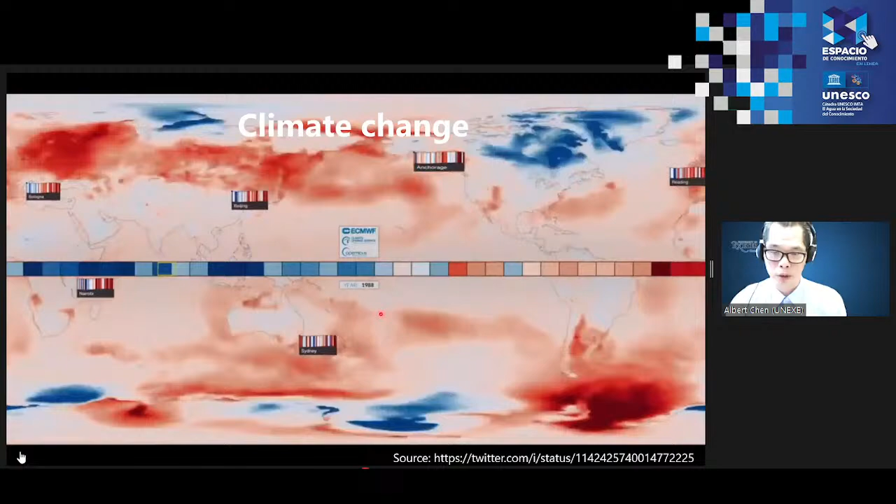So today I'm going to give you a quick introduction. We've been listening to the ambassador and Madam Secretary, who already highlighted the importance of climate change and how this will affect our society. With climate change, we have seen some change in water resource distribution because temperature change is driving a change of precipitation around the world, leading to more extreme and uneven distribution of water resources. This has also led to huge problems for the environment, creating challenges for water quality management.

On the other hand, we have also witnessed sea level rise in many coastal countries, affecting communities and increasing coastal flooding. Combined with extreme weather events driven by temperature and rainfall change, this also affects the likelihood of flooding in many parts of the world. This changing temperature also affects the likelihood of heat waves, leading to droughts in many parts of the world. All of these have impacts not only on property, but more importantly, huge impacts on human health.

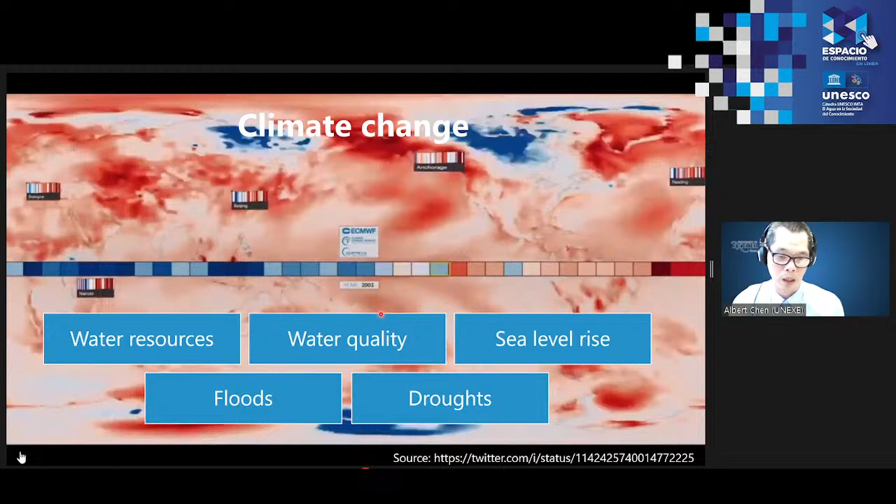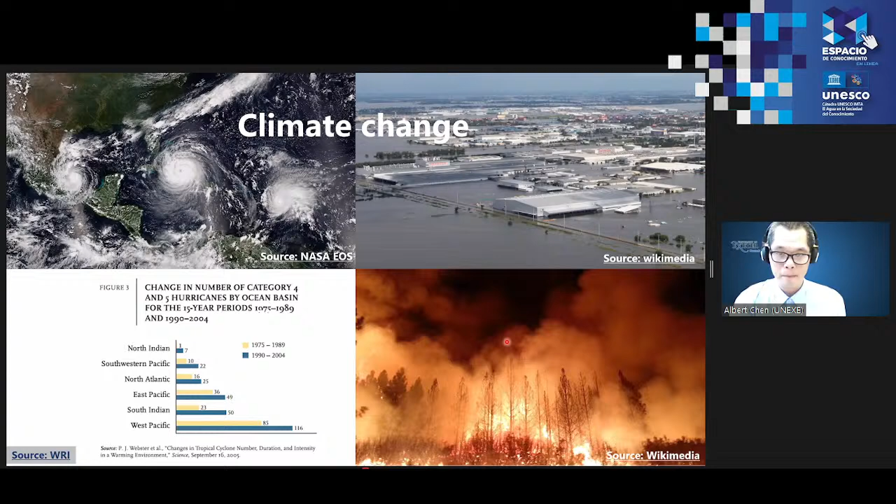So as a result, we try to focus on how flooding will impact human health, through different projects we have conducted recently. The first one I want to introduce is looking into flooding and how it associates with pollutant and pathogen propagation.

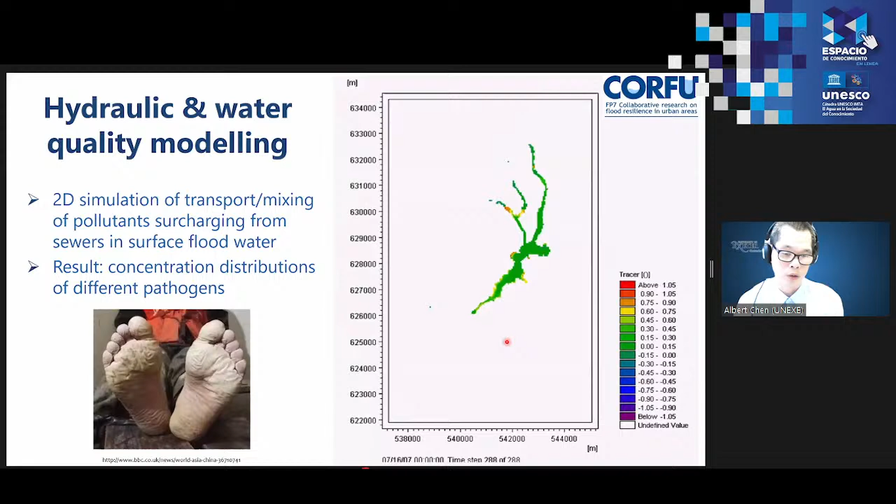As a result, we adopt an approach called Quantitative Microbial Risk Assessment, QMRA, to quantify the risk associated with flooding on public health. First, we use a hydraulic model to simulate the dynamics of a flood, and combining this with water quality data, we are able to find out the dilution and concentration of different pathogens in the flood water.

Then we combine this with other information such as the exposure of different people and populations in those areas, and combining with different age and gender population groups, we identify the vulnerability of people who have contact with the polluted water—what's the likelihood they will get ill.

We use a Monte Carlo simulation to run many scenarios to see the possible combination of different conditions. With that information, we create a map or statistical information on the probability of infection for different demographic groups exposed to the pathogen risk, so we can quantify the likelihood and how many people would be affected by this water pollution and their health impact.

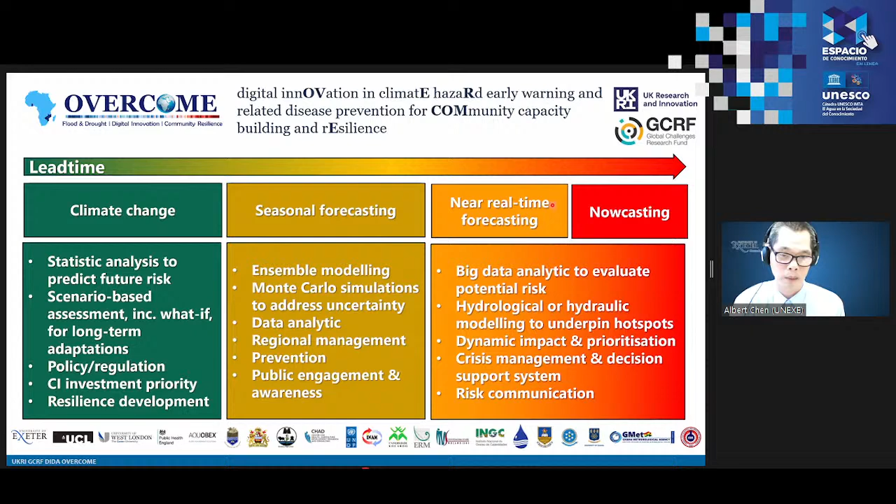So the next one is not really about climate change, but it's what we are all experiencing at this moment. This is work we recently developed, trying to look into how we can use our intelligence in water to better predict the spread of COVID in communities, and better inform public health managers to adapt and make quick decisions to prevent the spread of COVID-19 in our community.

So for this, we try to take measurements from the wastewater, combining with biomarker information within the wastewater, so we're able to analyze the population and which areas in the community are more likely to have higher potential COVID-19 cases, based on measurements taken from wastewater. People might already be infected by the virus but not yet show symptoms. By using this technology, we can identify which areas have higher potential, in order to enhance public health facilities or services for those areas, or implement response measures to reduce the spread of COVID-19 in communities and better protect public health.

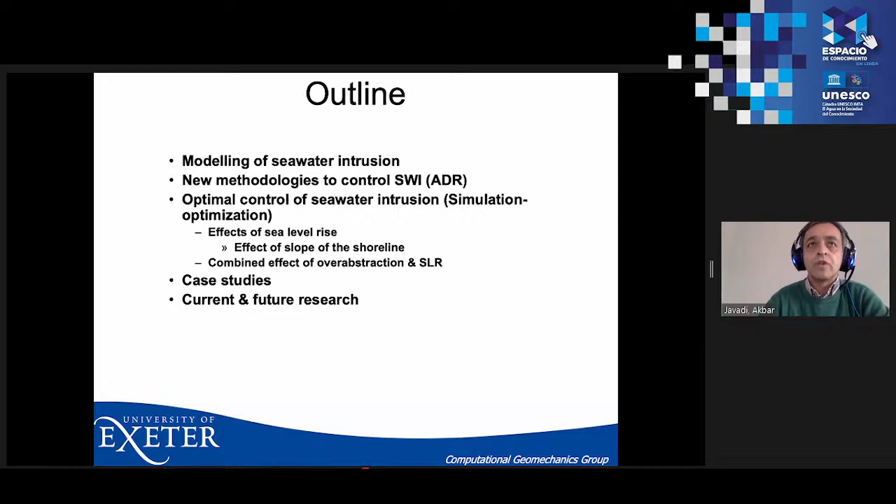As background, about 70% of world population live in coastal areas, and many of these coastal regions depend either entirely or mainly on groundwater resources for their water supply. In coastal areas, groundwater is in direct contact with saline water under the sea. With increasing population, there's increase in water demand.

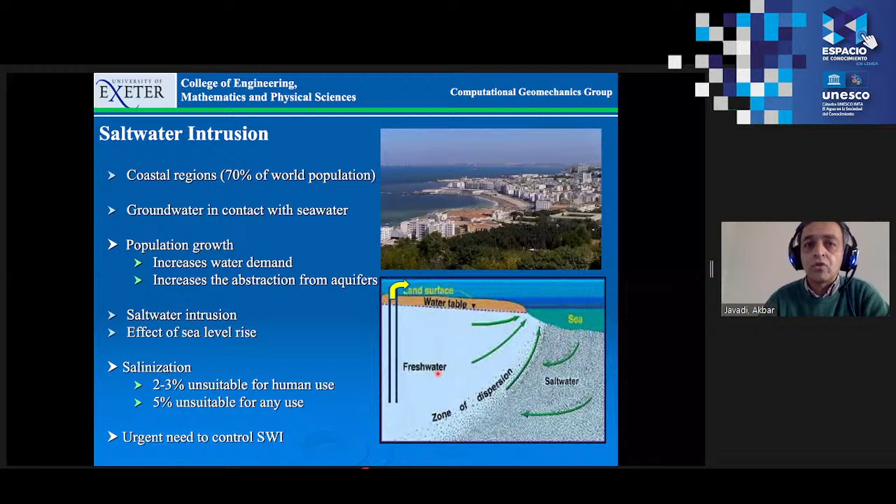As a result, there's increased abstraction from groundwater, which results in intrusion of saline water into aquifers. On the other hand, with sea level rise, the head of saline water increases, which pushes the salinity further into groundwater. The problem is that a very small percent of salinity in groundwater could make it unsuitable for human use or any other uses. Many countries have lost their coastal aquifers to seawater intrusion, so there's an urgent need to control seawater intrusion.

For this research, we started with developing a numerical simulation model to simulate flow of water and salinity in soils, adapted to simulating seawater intrusion. We have validated it against standard benchmark problems and against analytical and other numerical simulations.

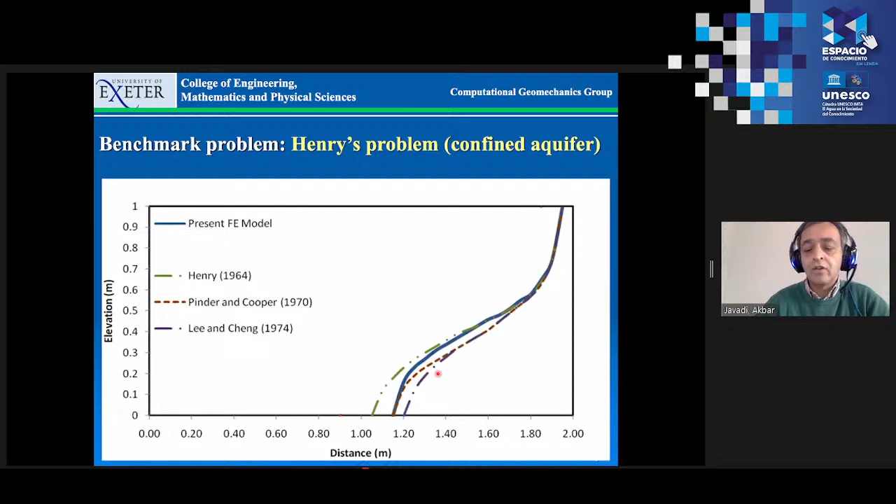Then we used the model to propose a new method for controlling seawater intrusion, based on abstracting the saline water and at the same time recharging the aquifer with treated wastewater, stormwater, or other sources of water. This abstracted water can either be dumped in the sea, or in areas of the world where there is water scarcity, it can be desalinated and used as part of water supply.

We have also proposed a similar method to the previous one, but this time the recharge can be done by gravity using surface ponds or tanks under the ground.

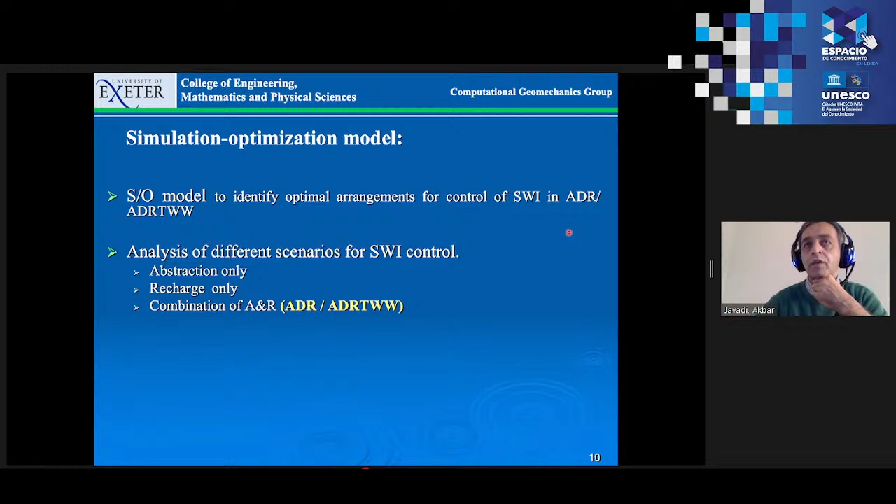We have developed a simulation optimization model in order to optimize the arrangement proposed in the previous method of control, and we have applied it to a number of case studies, including a benchmark problem.

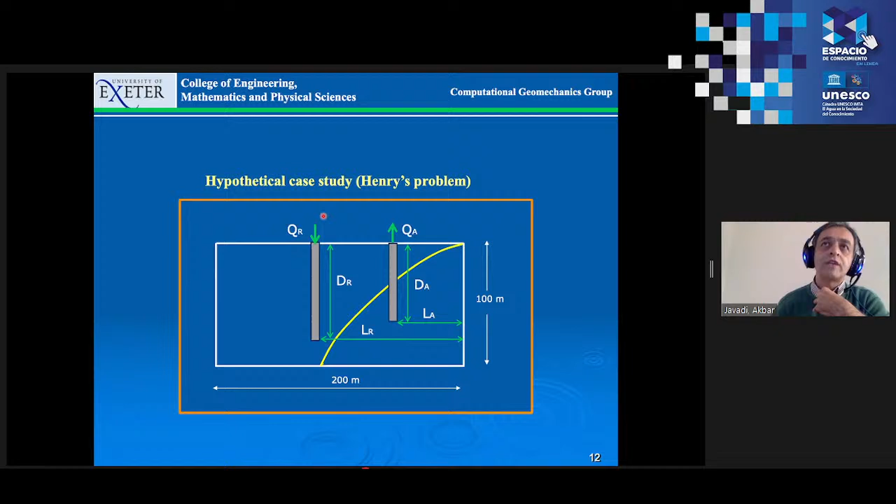We formulated the problem as an optimization problem: if we are going to use abstraction and recharge, what would be the optimal location for abstraction and recharge wells in terms of distance from shoreline? What would be the optimal depth for each well? At what rate do we need to abstract? At what rate do we need to recharge in order to minimize the overall cost and minimize the salinity in the aquifer, subject to some practical constraints?

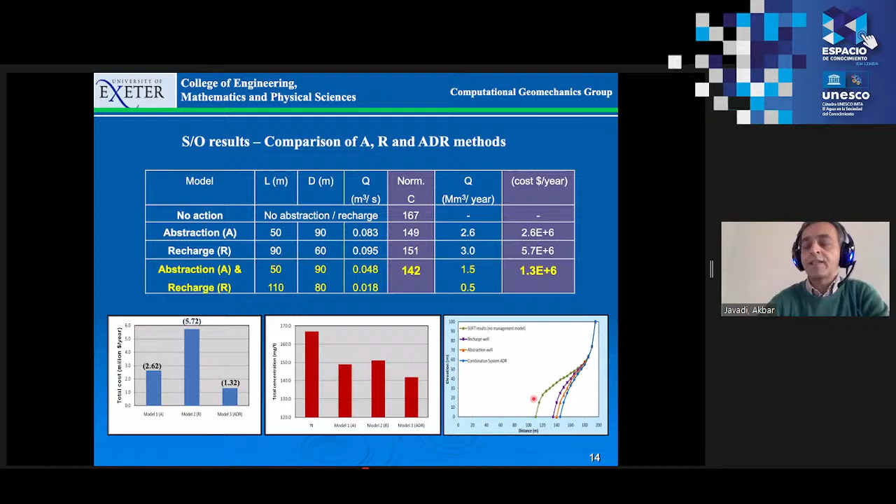This is a summary result of this application to a benchmark problem. We have shown that compared to existing methods like abstraction only or recharge only, our proposed method can significantly reduce the cost, significantly reduce the salinity in the aquifer, and push back the interface between saline water and fresh water further towards the sea, creating a larger volume for fresh water.

We have done the same for the other method, using gravity recharge, and performed similar optimization without going into too much detail.

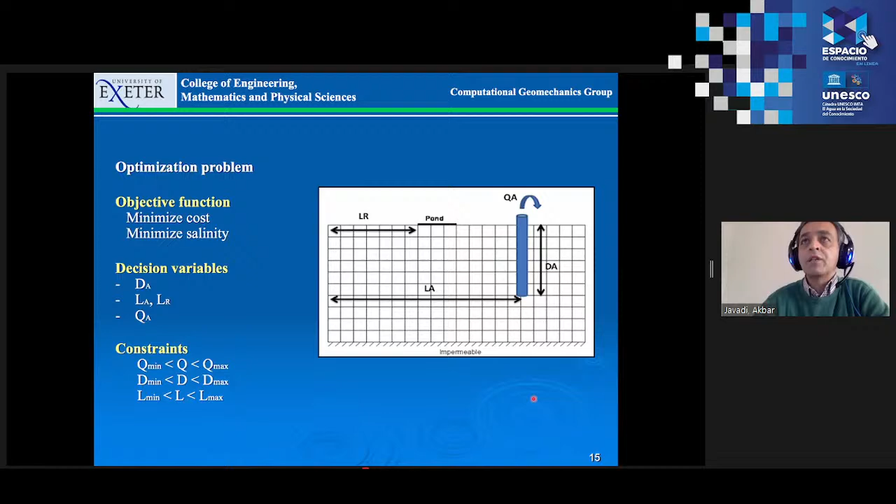We have shown that our proposed method can reduce the salinity by 65%, compared to 26% for abstraction only, at much reduced cost, at a quarter of the cost of abstraction.

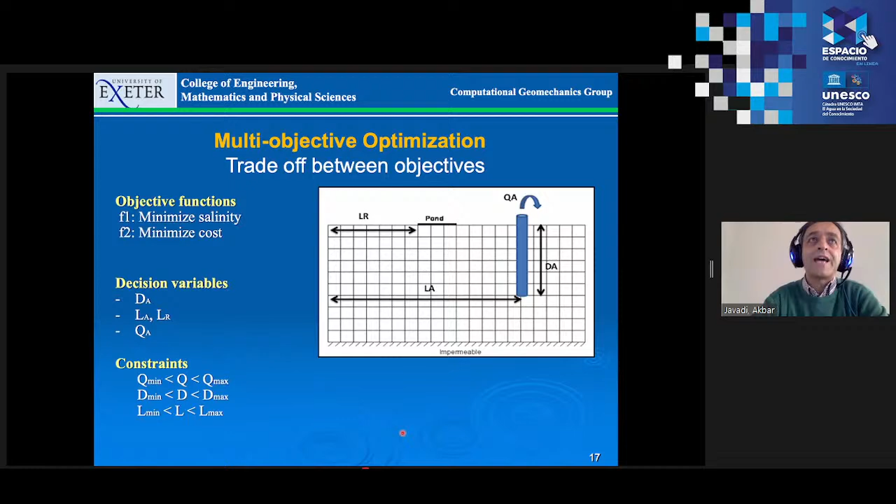We have also used multi-objective approaches to trade off between different objectives of cost and salinity in the aquifer. For the second case, we compared our method with recharge only and abstraction only, and shown that the trade-off our proposed model produces significantly reduces the cost and reduces the salinity compared to other methods.

So the advantage of this approach is decision makers will have a lot of options to choose from, depending on what trade-off they can accept in terms of salinity and cost.

The next study we have done is the effect of sea level rise on salinity intrusion. By increasing sea level, the head of saline water increases, which pushes the salinity further towards the land. On the other hand, depending on the slope of the shoreline, a large area of the ground can be inundated, flooded by rising sea levels, which further moves the interface between saline water and fresh water, exacerbating the situation.

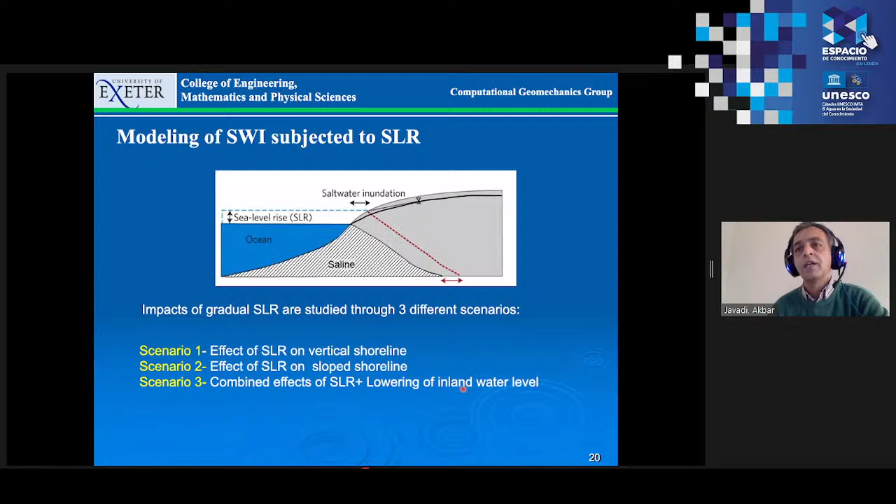Here we have looked at different scenarios: the effect of sea level rise without considering land flooding, the effect of this flooding as well as sea level rise, and also the combined effect of sea level rise and over-abstraction in the form of lowering of the groundwater table.

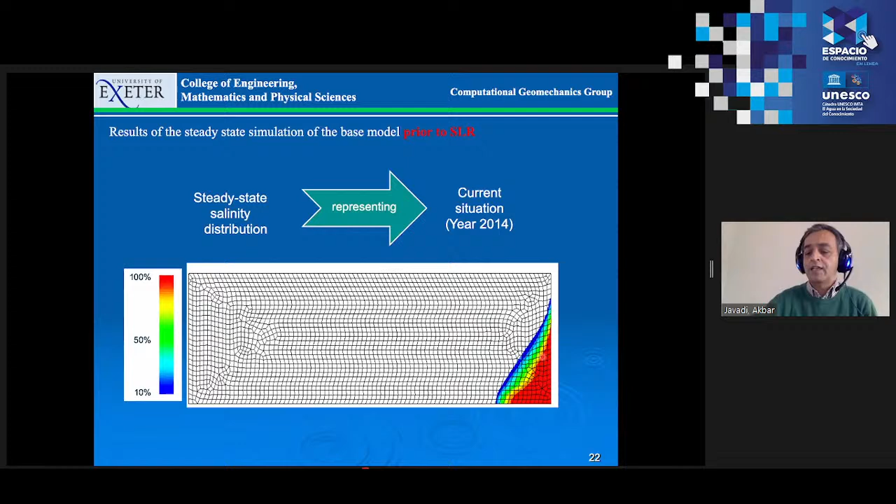For sea level rise, we considered a moderate increase based on IPCC recommendations - by the end of the century, we assume the sea level will gradually rise by 0.65 meters.

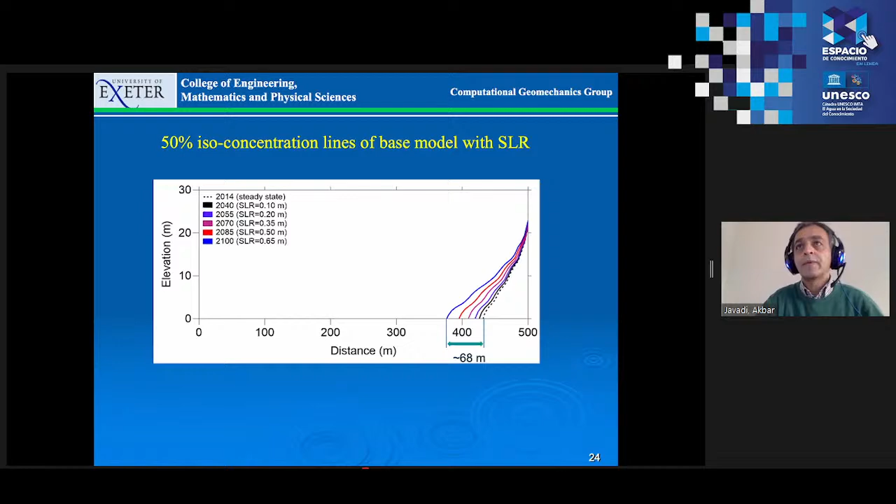Here we show the interface between saline water and fresh water. We've shown that by increasing sea levels, the interface will move gradually towards the land, towards the groundwater, and this shows how it gradually moves in different years throughout the century.

In that analysis, we did not include the effect of land flooded by seawater intrusion. Here we considered the effect of the slope of the ground as well, analyzing it for different slopes. We have shown that the flatter the slope, the larger the area of land flooded, and the intrusion can be significantly more than the assumption of no flooding.

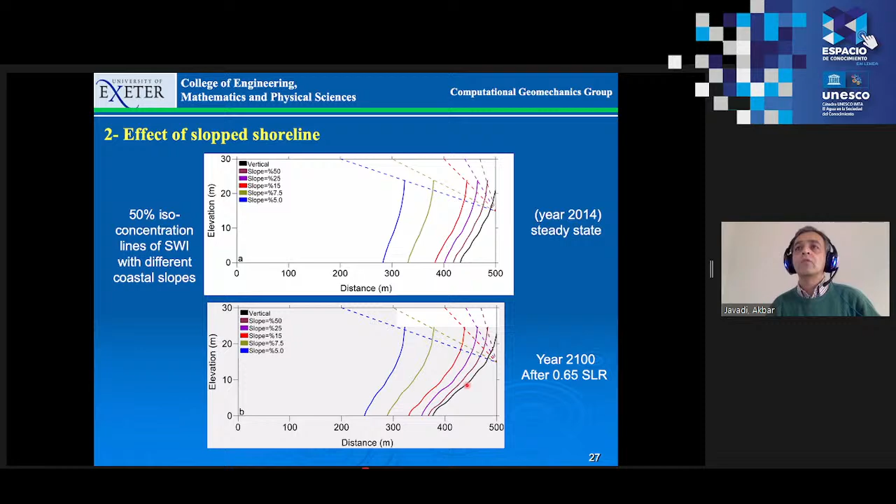And this is the results for the start of the analysis, 2014, and this is for the end of the century, where the gradual movement of salinity is predicted.

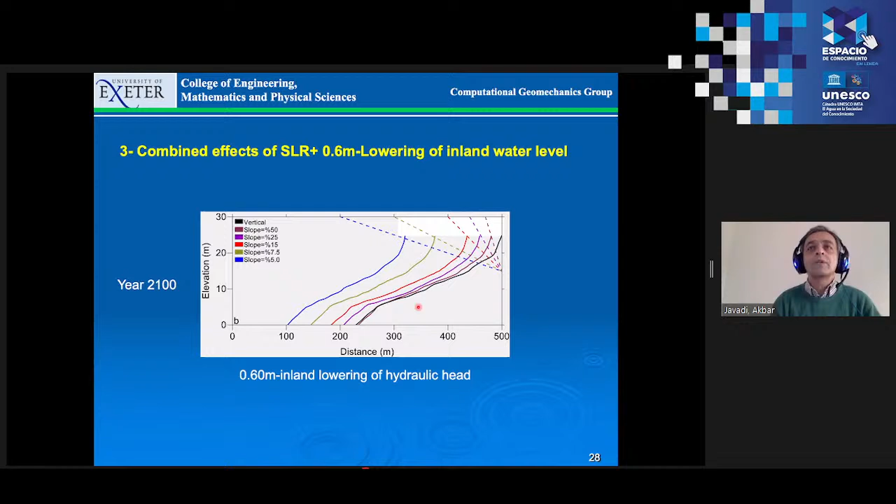For the last scenario, we analyzed the combined effect of sea level rise and lowering of the groundwater level due to over-abstraction. We see that in this case, the combined effect of over-abstraction and sea level rise could almost entirely contaminate the groundwater. So this is a comparison between the combined effect of sea level rise and lower groundwater versus only sea level rise.

We have applied this modeling, optimization, and control method to a number of real case studies in United Arab Emirates, Wadi Ham Aquifer, in Nile Delta in Egypt, Gaza Strip in Palestine, and Pingtung in Taiwan. In Taiwan, we also looked into integrated management of surface water and groundwater resources, trying to see how we can use flooding against seawater intrusion using the proposed methods.

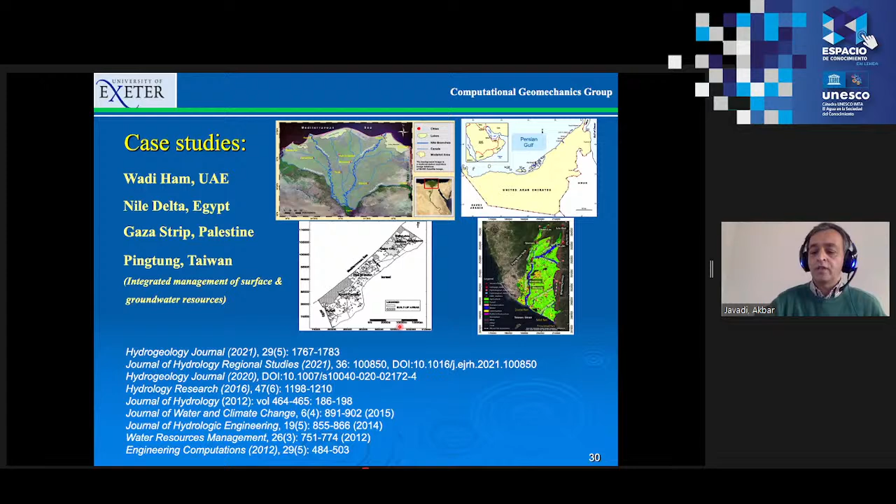So I would like to end here, and I would like to acknowledge the funding we have received for this from British Council and Royal Society. I would be very interested to discuss this topic further. Here's my contact details - thank you very much for your attention.

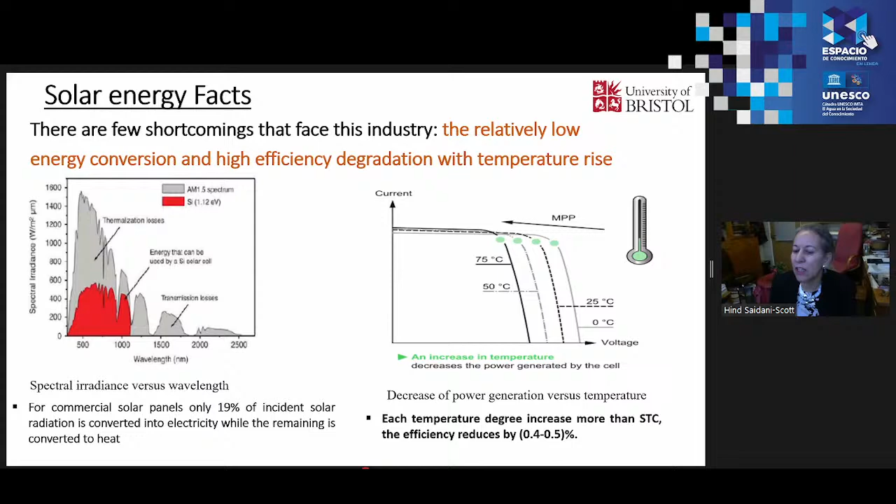Technical solutions: we have various solutions to solve this problem. One is the active system - we put a fan and a pump, or we pump cold water, or we blow cold air. It's power consuming, so all the energy you gain from what you're losing at very high temperature, you're going to use to run these fans - so it's not very economical. It's based on forced convection, which is better than natural convection. It is an effective cooling system because it's forced and in direct contact.

The other methods are what we call passive systems. We don't use any power consumption. They are based on natural convection, so we let the air circulate by itself if it is cooler, which is not always the case. It's less efficient than forced convection, but it has good, acceptable cooling performance.

The material we use for cooling, we attach it under the PV panels. Both methods eliminate some heat - they take the heat from the solar panel, and then we can use this heat. We can either use it for recovery from the PVT - what we call photovoltaic thermal panel - where we heat the water and use it either for heating, air conditioning, or other things. Or we can just dump it into the air.

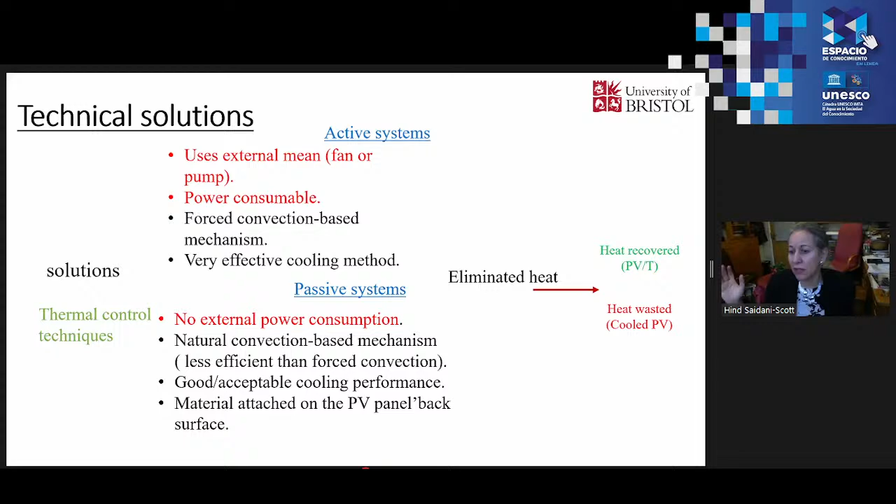In our group, our research objective is first to search for sustainable solutions for enhancing thermal and electrical performance of PV panels and benefit from the absorbed heat in the material, for other applications like heating, humidifying, water generation for greenhouses, or even cooling. Second is applying new innovative systems that use different heat and mass transfer mechanisms for cooling solar panels, using nanotechnology to increase thermoconductivity and system efficiency. From that, we're developing a new nano-hybrid PV system with an eco-exergy study showing it is feasible, durable, sustainable, and based on renewable sources.

So what we are doing, I'm going to go quickly and explain. We have an experimental setup—the majority of my work is experimental, and we do analytical work too, but we've done some simulation. The majority is experimental.

We have a laboratory, the thermofluid lab at Bristol in the engineering faculty. We have a heat source simulating solar energy, and we put different materials under it. We always have a reference material, and we can change the irradiance from 1,000 or 800.

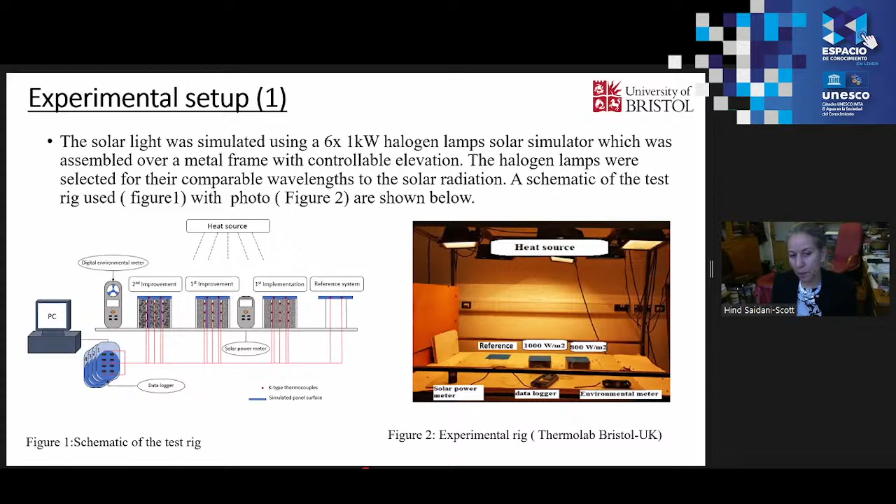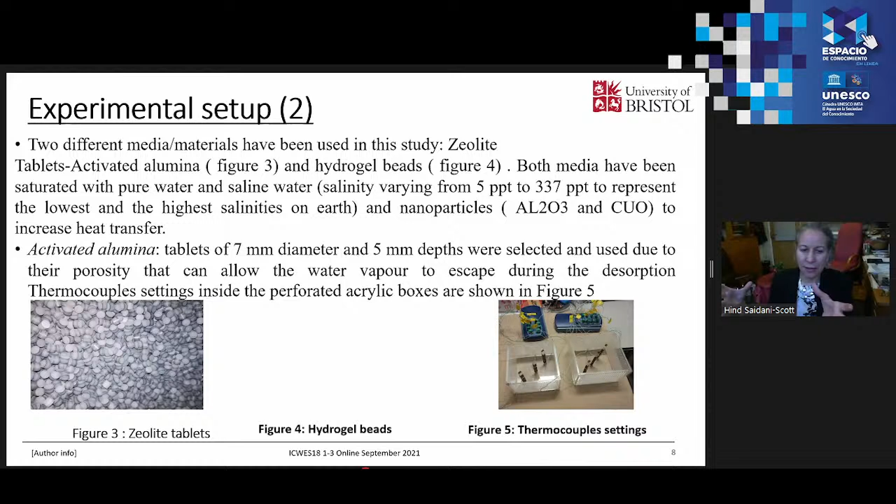What we are doing is trying to cool our solar panels using materials that we put underneath them. We wet them at night, letting them become saturated, like zeolite—we have zeolite here, and also activated alumina. We also have hydrogel beads, shown in figure 4, which we saturate with water.

I don't know if a lot of you know what zeolite is. Zeolite consists of solid tablets, so their volume doesn't really change, but they are very porous and they absorb water. The second material is hydrogel.

I think a lot of you have already seen hydrogel. They are very solid, small bits, and when you put them in water, they take up to 500% of their volume in water. We put them around plants, or in other places where we want to keep humidity—not water content, but just humidity. They keep evaporating; water evaporates from the hydrogel and keeps the environment humid. So we are using this.

We have used these two elements, zeolite and hydrogel, to cool the PV panel. We put them in water all night, and in the morning we place them under the solar panels. We study the thickness needed to cover the complete temperature range from 10 o'clock until 4 o'clock, with the maximum, of course, between 12 and 2, so as to cover that whole period.

So the water, when it evaporates, gives us the latent heat of evaporation. It's cooling the back of the solar panel and making it a lot more efficient.

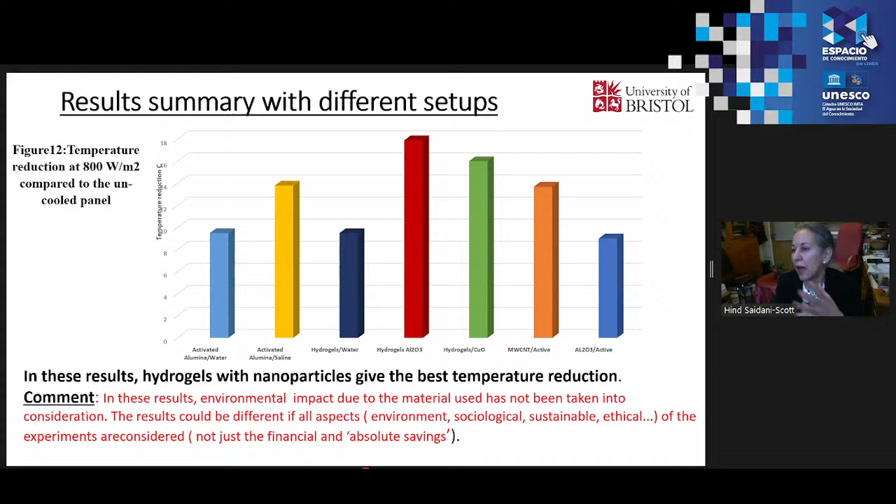In these results, the environmental impact due to the material used hasn't been taken into consideration. The result could be different if all aspects—environmental, sociological, sustainability, ethical—are considered, not just financial.

So that's the kind of study that we are doing, and we want to do more of it. Thank you.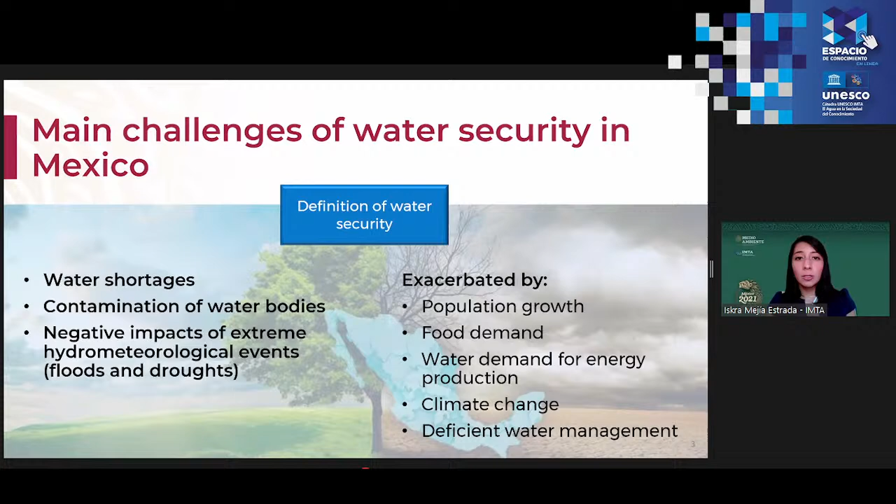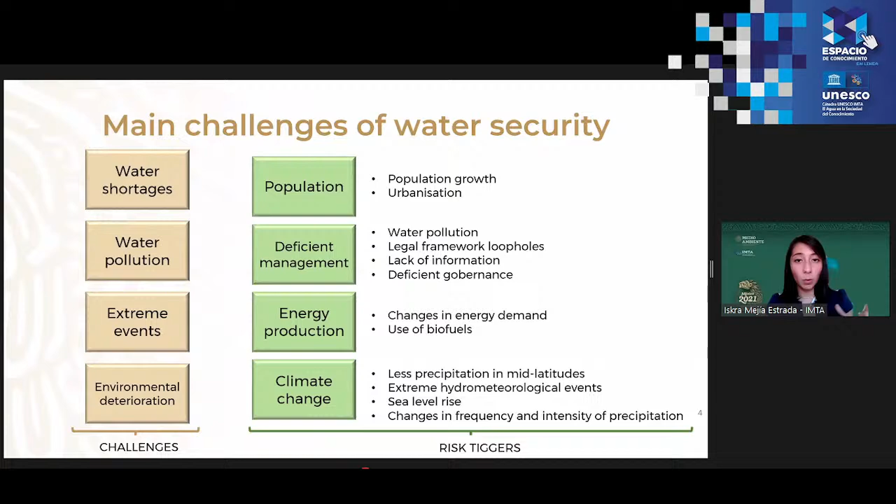So this diagram is pretty much a summary of what I've just mentioned regarding the main challenges of water security. We have the challenges, and on the right side we also have the risk triggers, grouped by sectors because this allows us to determine more specific solutions and outline better objectives for the projects. It's really important to determine which sector or which triggers cause these challenges of water security, because, as I often repeat in any talk I give, you can't improve what you can't measure. So it's important to identify the sectors to have a better outline of the problem we're facing. And to add to all of this, we also have the impacts of climate change.

The main impacts will be seen precisely in the hydrological cycle. In the case of Mexico, recent studies estimate that by the end of the century we'll have a decrease in precipitation of around 15%. There's also a decrease in surface runoff and aquifer recharge that ultimately determines water availability. This will be enhanced by climate change, because part of the precipitation will be retained and evaporated in soil and vegetation without even reaching surface water bodies or groundwater storages.

There's also a great area of opportunity to do detailed studies. For example, IMTA has made studies in the basins of the north and the transboundary basins regarding water availability using satellite-derived information.

In the case of food production in areas with irrigation problems, we also have to add the problem of wider or larger climatic variability. Here I'm talking about more frequent and intense droughts, followed by intense precipitation periods, which in general will lead to lower water availability.

So I'm going to present quickly a couple of projects being developed at IMTA. The first is about real-time forecasting of intense precipitation in urban areas, and the second is a project aimed at desalting groundwater through solar energy for irrigation purposes.

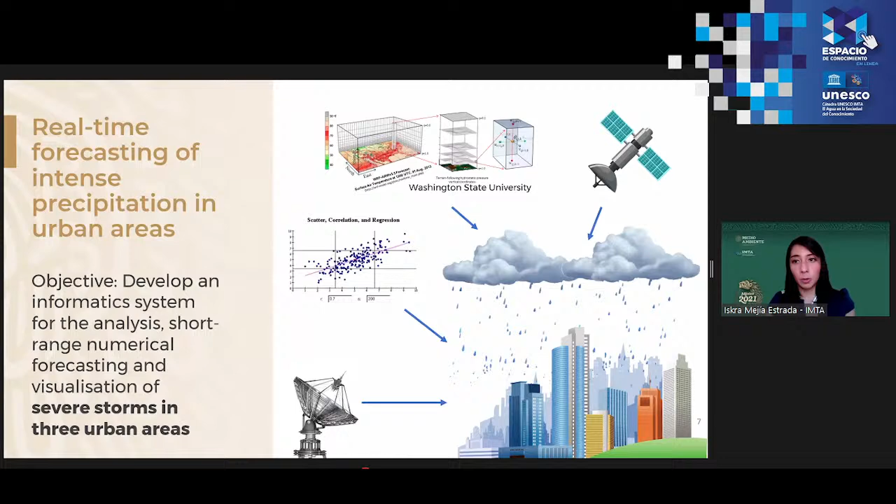This system is being developed for the National Weather System in Mexico, and we're going to provide information through a visualization platform that will contain the outputs of the numerical weather prediction modeling for the 3 areas, as we can see on the left.

We also provide information on the number of days with favorable conditions for convective storms using information from ERA5, and we're providing an analysis to determine the probability of severe storms. All these systems will be provided for the urban areas, and as I mentioned, the radar information will be provided for the metropolitan area of Mexico City.

We also have another project about desalting of groundwater through solar energy for irrigation purposes. The objective, as shown in the slide, is to implement a water desalting system for small-scale irrigation purposes.

In this case, we have technification in 4 stages shown in the slide, where the main actions will include installing a desalting system in a 600 square meter field. This is just a test field in the north of the country.

Regarding the practices shown in the slide, we also provide training in soil management and irrigation practices. This is something that characterizes the tasks of IMTA, as we develop technology as much as we make sure this technology is adequately transferred to those who will be applying it long term.

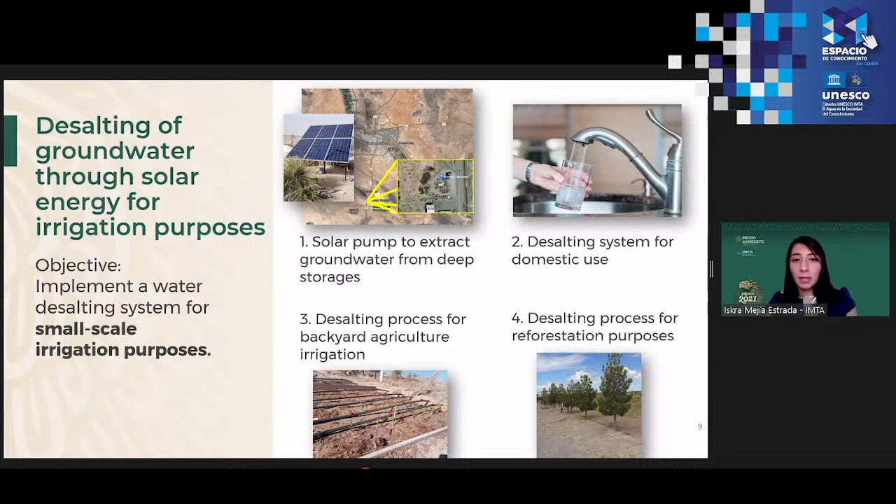Regarding the use of all the tools included, we do provide training, and we make sure that the people implementing these methods and systems have proper training and are adequately trained, to make sure the project is applied long term and not only during the duration of the action of IMTA.

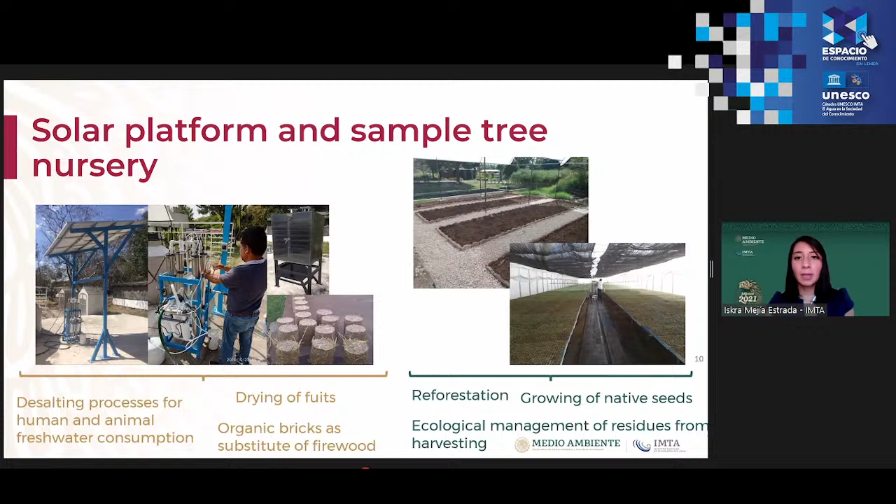The points I would like you to take home are mainly three. Regarding water governance, this requires solving the complex problematic scenario already described. An essential component, point number two, to adequately address the challenges of water security is knowledge and innovation generation. We definitely need a better understanding of both the natural and social processes involved in water management, highlighting the importance of considering all the anthropogenic factors. This has to be under the adequate legal frameworks to make sure water governance is appropriately observed.

Finally, water security in many countries has become a matter of national security, and no country can minimize the urgency of achieving adequate water governance through research and international collaboration. That would be everything from my part, so thank you very much for your attention.

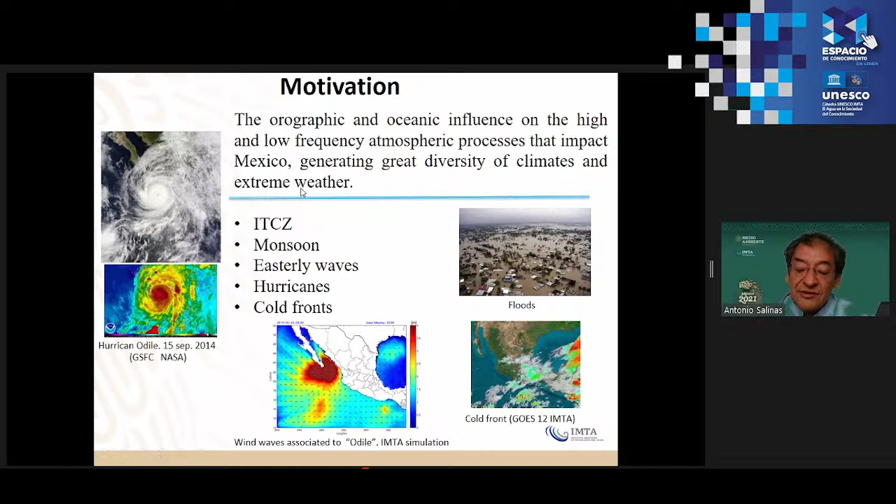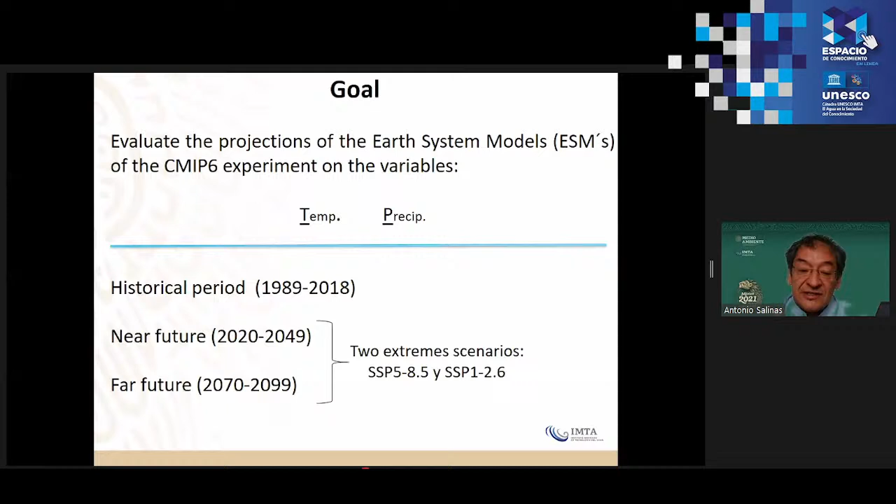As a background, the CMIP-6 project was planned to answer three questions. The first is, how does the system respond to forcing? The second is, what is the origin and consequences of systematic model biases?

We can see the model biases could be related to regional phenomena but also global phenomena and their relationship. For example, clouds and circulation is a complex process, and we have to understand better if this is a systematic bias, and also the ocean-land contrast. So the bias is not easy to identify and to associate to a process.

The third question is: how can we assess future climate change given climate variability, predictability, and uncertainties? With that uncertainty, we have to evaluate the impacts. This is not easy, and we have to decide how we can construct the best information for the public in general.

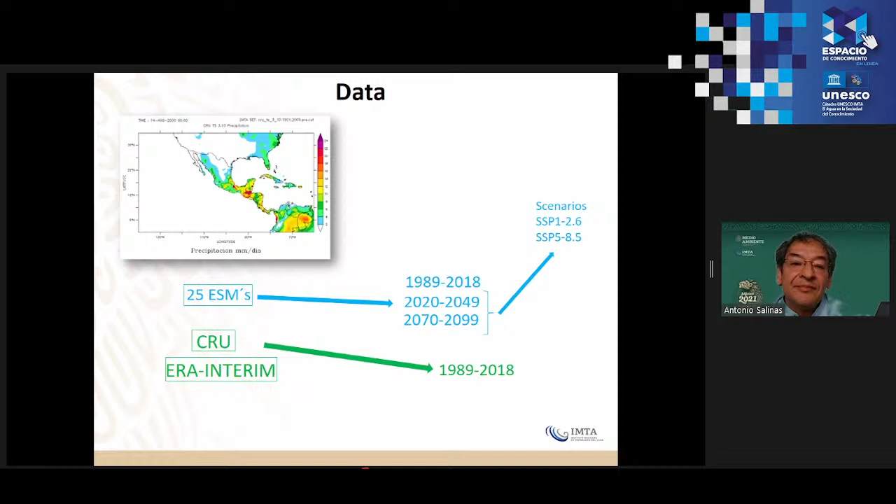The data we used to evaluate the models are the 25 models from CMIP-6, CRU data, and ERA-Interim reanalysis for the historical period. For the future, we use two extreme scenarios, so we can compare for the past, in the historical period, how well the model can reproduce the main processes here in the tropical part.

In a general way, the results can be seen in this simplified diagram. The database we use is the CRU observation and ERA reanalysis, and the 25 models we wish to evaluate, using metrics like root mean square error, mean absolute error, standard deviation, and correlation. We use just precipitation and mean surface temperature.

We calculated annual cycle and seasonal cycle for four regions, two in the north part of Mexico and two in the south part of Mexico. In a general way, we analyze spatial and temporal variability for these models for our region in Mexico.

Precipitation is one of the most difficult issues to simulate by the models. On the left side we have the ERA-Interim precipitation. We can see the typical intertropical convergence zone, and two extreme precipitation areas here in the south part of Mexico between Guerrero and Oaxaca states, and also in Chiapas. We can also see the monsoon and the middle center of the country with less precipitation.

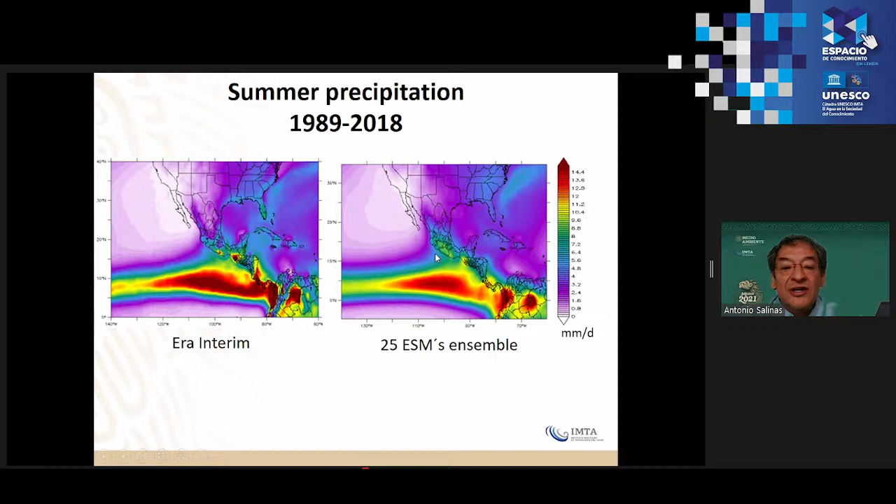With the multimodal ensemble, we can see in a general way the same pattern in the ocean. The ocean is easier for the models to reproduce the precipitation, but in the continents it's not so easy because of the orographical features. So in the models it's not well represented because of low resolution. But in a general way, we can see the distribution of precipitation in the continent, in Mexico, but without the extremes that we saw in the ERA-Interim data.

For temperature it's easier for the models to reproduce. On the left panel we can see the temperature; for example, in the tropical Eastern Pacific, temperatures less than 22 degrees Celsius. We can also see the effect of the mountains here in Mexico with less temperature, less than 20 degrees, because for example in Chihuahua and Durango we have this extreme temperature.

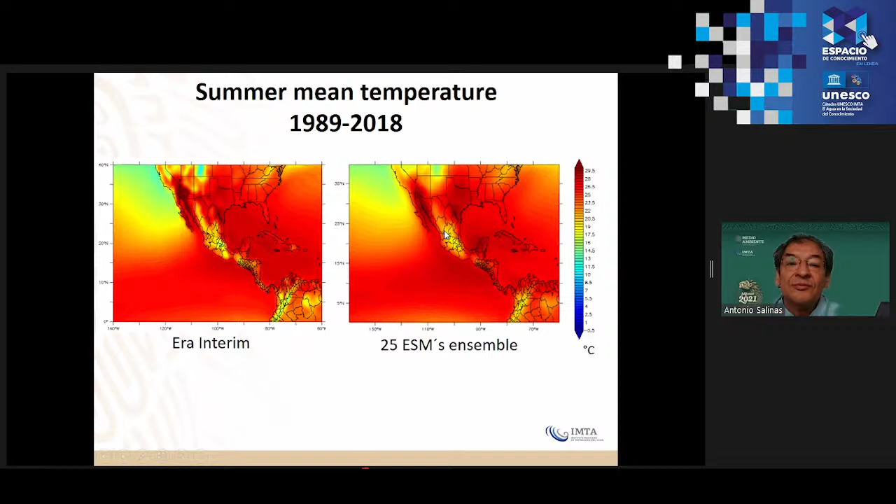For the multimodal ensemble, we can see in a general way the same spatial pattern, even in the continent. So the temperature is better reproduced by the models, even for the continents.

We analyzed 4 areas, and in the rest of the presentation I will focus only on the southeast area because we receive every year more precipitation here.

We can see, for example, the CRU and ERA data in the annual cycle graphic, and we can identify in a general way a bimodal distribution with two peaks, one maxima in June and the other in September from the historical period. The multimodal ensemble can reproduce in a general way the two peaks, but not the variability between July and August, that is, the midsummer drop.

For the future, the near future, for the 25 models, we recognize here a shift of the peak, from the maximum in September to possibly October. This is taking into account the 25 models.

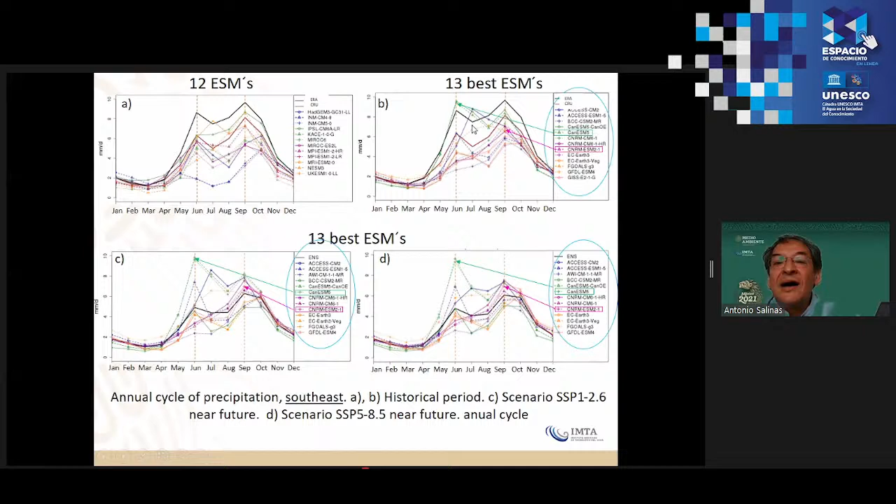I will say something different when we select the best models. In the top part of the panel we can see the 25 models; on the left side, the first half, 12 models, and on the right side, the best models. I will focus on the best models, and we can identify here in a general way the bimodal distribution, comparing with the CRU and ERA-Interim databases. But not all the models can reproduce this bimodal distribution, so that's why we have to select the best model or the best several models also.

So we can identify here the Canadian model and also a French model, the CNRM model. These two models are working better for our region here in the southeast part of Mexico. And the rest of the analysis will focus on this.

So for the near future, we can see, for example, here the ensemble of the models. Obviously, we don't have data for the future, but we can see that it still is here the bimodal distribution in June and September. And this here we have our best models, the Canadian and French models. And for the near future, we can see more or less less precipitation by 1 millimeter per day, some more or less.

We have to take this into account in a better way, because the ensemble is not explaining many things.

So for the temperature, we can see here, for example, the typical annual cycle for the southeast part of Mexico. We are in the same part. So we can see, for example, from April to September the maximum, that we recognize here with our best models, the Canadian and the French model.

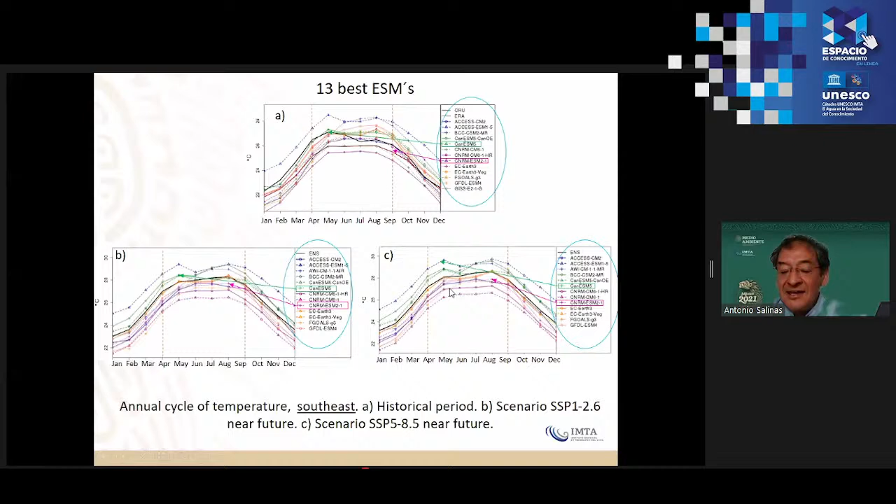And for the near future, but the worst scenario, we can see that in a general way we could have more, like 1 degree more than we have right now. But remember, we have seasonal variability, so we cannot only say that we will have more precipitation or temperature just in an annual perspective. We have to see that in a seasonal perspective.

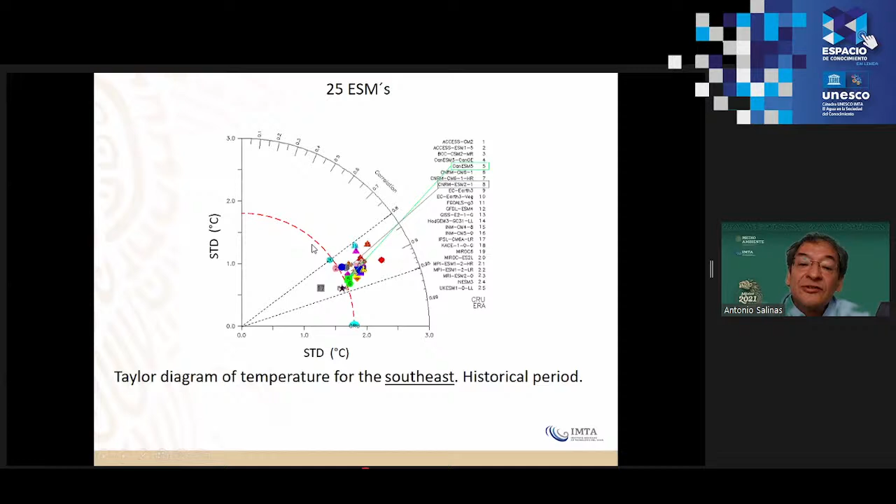Yes, thank you. So if we see the comparison between the 25 models with the CRU data, we can see that we have correlation between 0.5 and 0.8. But if we see the temperature, the correlation is better, 0.8 to 0.95. So we can recognize here our models. This is our best model, the Canadian model, with the least error, the mean absolute error.

So as a final remark, I can say that we recognize the best models, and using these models we describe the precipitation cycle in the southeast part, but also in the ocean, the distribution of the temperature of the ocean. With these models, we will improve precipitation and surface temperature using dynamical downscaling.

So next year and this year we are working on a program, a project with Canada, the Quebec University, and Universidad Veracruzana, to have this dynamical downscaling for two regions, in Mexico, in Veracruz, and also in the southern part of Quebec. So we also submitted a new project to CONACYT. We are working on that. We will continue to do that dynamical downscaling. So thank you very much.

Just by way of additional background, we simulate 3 types of flooding with our model. The first is fluvial flooding, which is flooding from main rivers where the river bursts its bank and inundates floodplains in the traditional way that most people think of flooding. But we also simulate pluvial flooding, which is flooding from intense rainfall, where we get quite localized and short duration flooding from heavy bursts of rain. We also simulate coastal flooding from extreme sea levels, which we, in a climate change scenario, will often add sea level rise to.

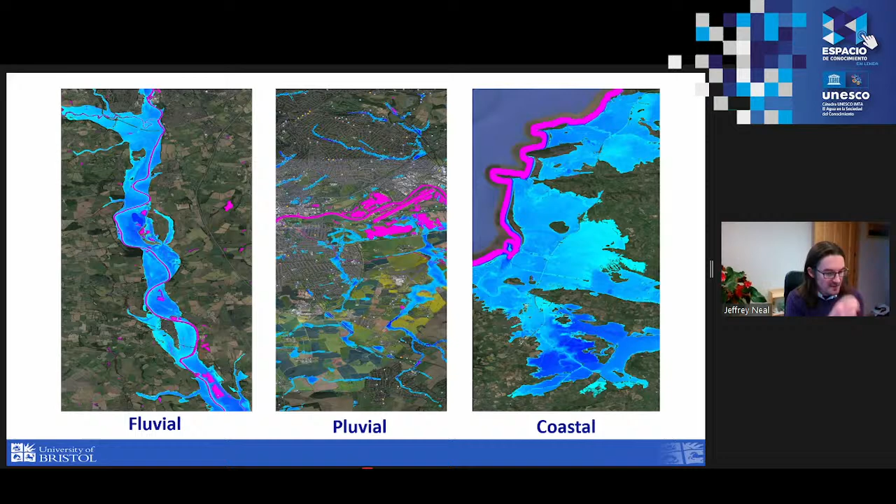The modelling that we do uses a hydrodynamic modelling system that essentially simulates the movement of surface water across the land surface in 2 dimensions.

This is an example from our UK model for the town of Tewkesbury in the UK. This is the River Severn. What you see in this simulation is initially at the confluence of these 2 rivers here, we see the river pops out of bank, and then we see the flood wave propagate downriver, down towards the southwest here, progressively flooding and then dewatering a little bit.

So this is the type of model we use, and the main development that we've been doing is working out ways to apply this model globally, and then to look at how climate might affect the simulations that we produce.

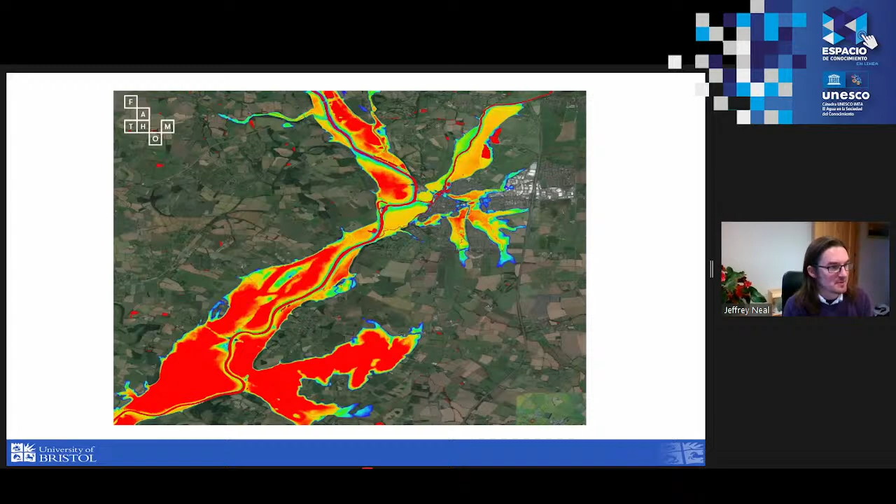That's for the UK. I can also show you an example of this model applied in Mexico.

Here we see the same model, but in this case we've categorized the outputs. Rather than showing a particular depth, here we've got categorized hazard based on the return period of flooding. So we see areas in blue that are quite unlikely to flood.

We expect these areas rarely to flood, going up towards the yellow areas where we'd expect flooding to be more regular, in this case about 1 in 20, 1 in 30 years. These will often be recognized floodplains by that stage. The low risk areas are those that have often been developed, in this case mainly for agricultural purposes, and where we might expect to see most of the flood risk.

So what I'm going to do is tell you a little bit about how we developed this global model, then take you through the evaluation of this model, and then some climate change assessment.

The global modelling work we do in Bristol really started back around 2005. As you can see, our plots back then are all in grayscale. But here we first started looking at simulating large-scale flooding in the Amazon River - this is a stretch of the Amazon and the Purus River, close to Manaus in Brazil.

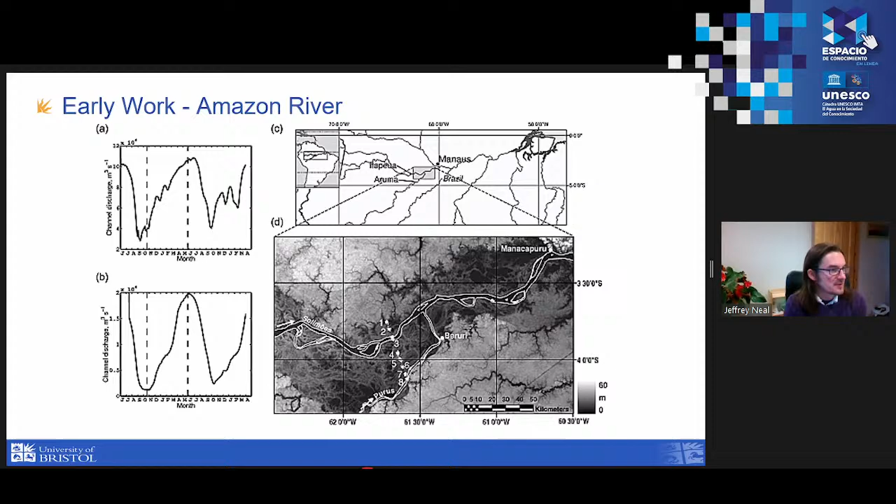Actually, the work was surprisingly successful, to be honest. We were able to simulate essentially the maximum extent of flooding observed each year with a reasonable level of accuracy. However, one thing the model really didn't do was dewater the floodplain in the right way.

And what this told us was that these models at the time, whilst they were able to recreate flood extents, really did that for the wrong reason. The reason places flooded wasn't because of the hydrodynamics or hydraulics really going on, but some other overland flooding mechanism that didn't really happen.

Around the same time, a lot of colleagues of mine worked on really understanding why these large global rivers inundated their floodplains and how we might better represent those processes in a large-scale flood model.

A lot of this work focused on understanding the role that river channels, particularly floodplain river channels, had on the dynamics of flooding in these large rivers.

Particularly interesting work by a colleague of mine called Mark Trigg, who's now at the University of Leeds, looked at how the connectivity onto the floodplain of channels in the Amazon River linked up the river to its floodplain and controlled the flood inundation dynamics that we saw.

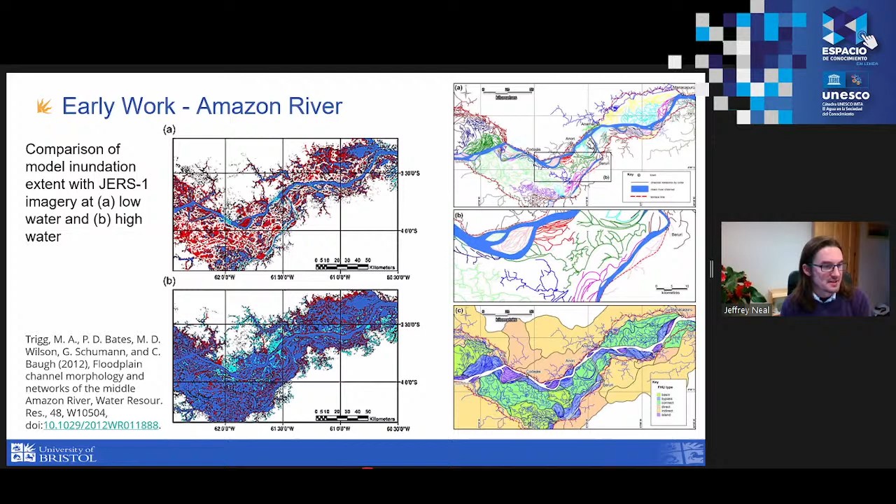So what we came up with was basically an extension to the model we already had. We developed a flood inundation model called LISFLOOD in Bristol. Essentially this is a gridded model - we lay a grid across the Earth's surface.

We give all the grid cells elevations, and then we put water onto that grid and the water flows downhill according to a simplified version of the shallow water equations. The water moves around and these models work really well at high resolution, but in our larger scale test cases they were fairly inaccurate.

So what we did was add a series of additional parameterizations to our grid cells to account for river channels. This is a model we call the subgrid model, and we added parameters to describe the bank elevations, the channel widths, and then made estimates via various means of the channel depths and frictions in our model.

This gave us a model that we could then apply over quite large areas efficiently to simulate the dynamics of flood inundation at large scale in a practical way.

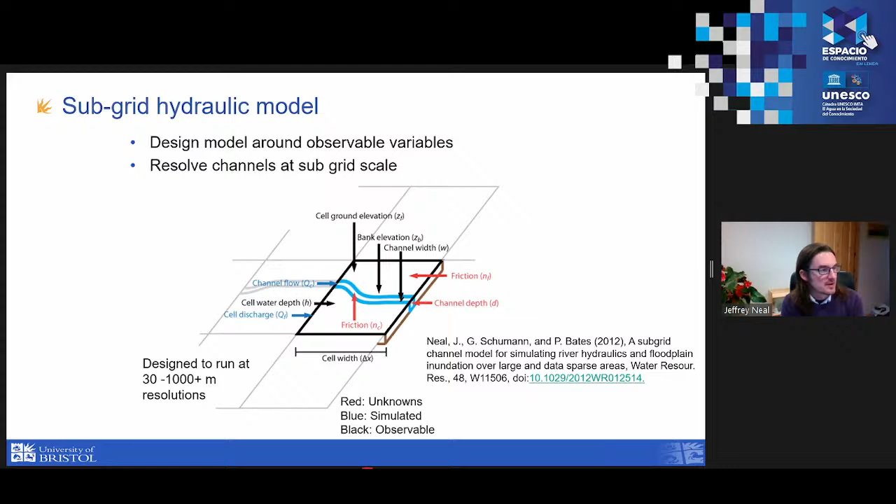Unlike ours, where we could wet the floodplain but couldn't dry it, what we wanted was to simulate this wet and dry dynamic with our inundation model, to give us confidence that the model simulated flooding for the right reasons. We did a bunch of simulations with our newly developed model, and also with various simplifications of that model that previously existed. We found we could get better simulations using this subgrid model, particularly of the dynamics we were seeing on the floodplains.

This was around 2012, and then around 2015 we decided to take what we'd done here and started thinking about modeling the entire world, simulating flood inundation globally at high resolution.

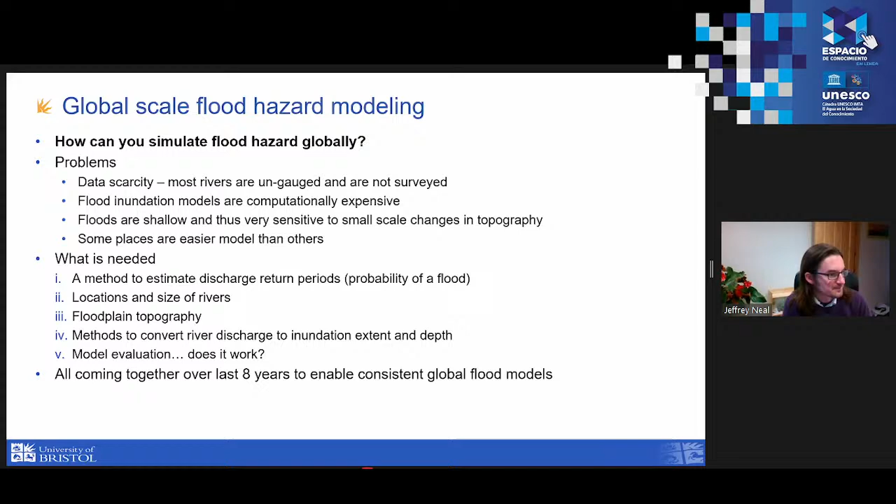That led to, in 2015, us publishing a model that looks a little bit like this. This is our first global flood model that we produced in Bristol - the first model that simulated hydrodynamically flood inundation at 90-meter resolution for the whole Earth surface at a number of return periods. Essentially this model has extreme flows coming in at the top, and then this hydrodynamic model, from which you saw the simulation earlier, simulating the floodplain inundation.

From that, we can estimate flood hazard and intersect with population data sets and other things to estimate risk and impact of floods. In the climate change case, under climate change we change these upstream flows that come into the model, or at the bottom end we change the downstream water levels, which are typically sea level and extreme surge heights out to sea. So how this model fits with the climate system is that the driving forces, the forcing terms, can be altered to account for changes to the climate or other scenarios.

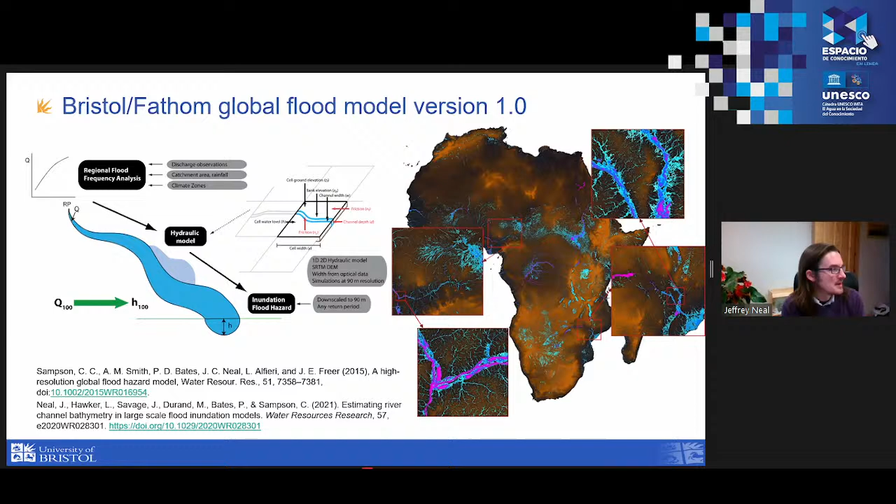So we did some validation of this model, and we were surprised, to be honest, that it worked at all. This is our global model applied in the UK - we're not using any UK data in this case, it's purely the global model that we ran everywhere.

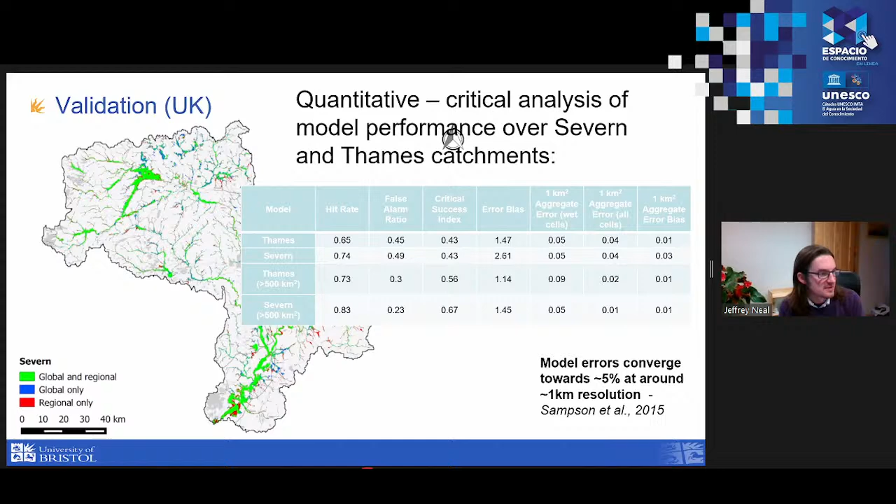Nevertheless, at the time we were surprised how well this did, but in reality there were still issues with these models. One particular analysis we were involved in looked at comparing our global flood model with a series of other global flood models. There were 6 in total at the time this paper was written in 2016. We did an intercomparison of these 6 models over the continent of Africa, and published a paper entitled The Credibility Challenge for Global Fluvial Flood Risk Analysis.

This was essentially asking: are these models credible? Because each of these models had done various bits of validation work suggesting they were quite successful—in our case saying it was 60 to 70% accurate.

What we see here is the result of this intercomparison over the continent of Africa. For every 90 by 90 meter square of Africa, this shows whether the models agree that the land surface would flood in the 100-year flood extent. Everywhere you see orange, one model thinks that area would flood. Everywhere you see 6, or down into the blues, all 6 models agree that area would be at risk of flooding.

The striking thing about these results is that the models disagreed more than they agreed. So if any model were the truth, the rest must be wrong more than 50% of the time.

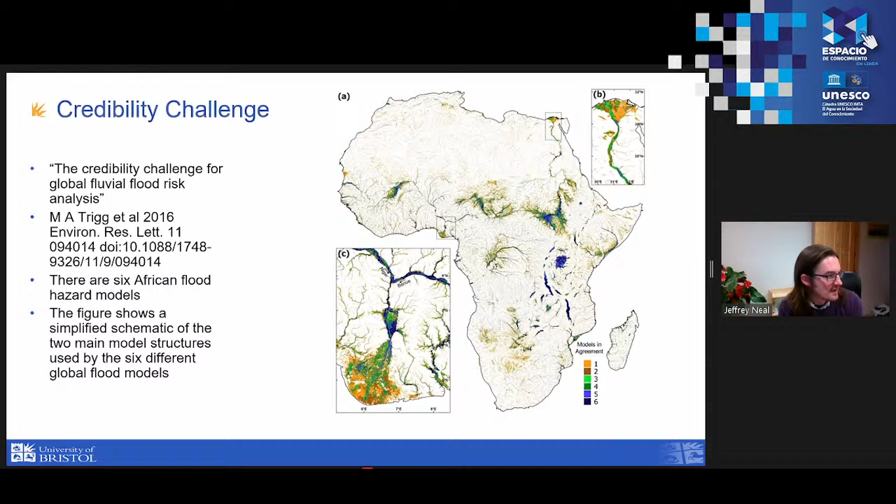When we get onto the deltas, however, we see large amounts of disagreement between the models. This is where the choices you make over the hydrodynamics you simulate really start to matter. So we had a series of models that disagreed a lot, and felt further work was needed to improve these. Over the next 5 years we've been working on this model to improve its performance relative to a number of benchmarks, and using new data sets to improve the accuracy of the model in terms of its representation of floodplains.

Here we see that model I just described on the left-hand side, called Global Version 1—these are the simulations we predicted. When you look at the floodplains here, it's quite blotchy and smooth, and doesn't really look like what a real floodplain looks like. You can't necessarily see the rivers or the structure to the data.

Our second version of the global flood model, released a few years later, involved a lot of work on the digital elevation model and how we represented the rivers. Here you can start to see some more structure in the data—we can see the river channels themselves, and we've got deeper flooding near the river channels. It's got some structure; it's not so blotchy anymore.

When we compare to observation data, that's the red here, for a flood 2 years ago—this is Beira in Mozambique, which was hit by Cyclone Idai in 2019—we can see there's reasonable agreement between these two data sets.

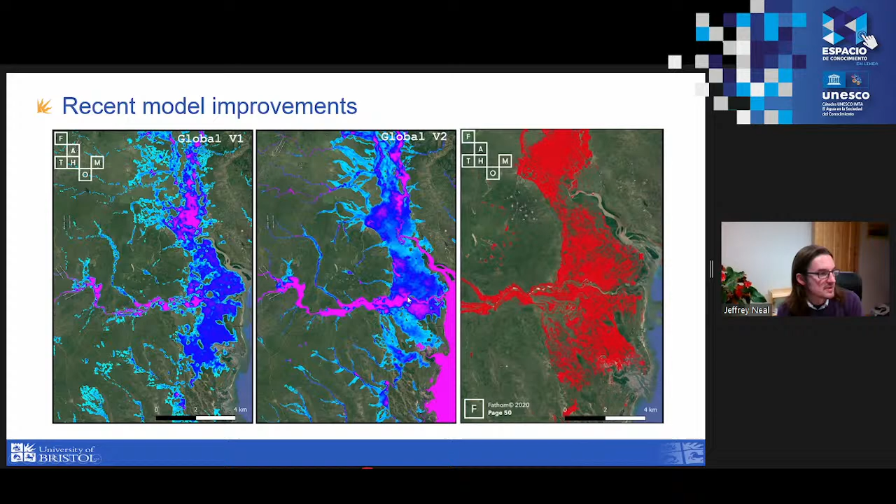This is the latest version of our global flood model, which we're slowly rolling out over the whole world. We've run it in a few locations so far, unfortunately not Mexico yet.

Essentially, our contemporary models consist of 3 sets of data that we produce in Bristol. We produce a global flood model with 30 to 90 meter resolution, simulating 10 different return periods everywhere. We have bespoke models in the UK and US with slightly higher resolution, which I'll present climate change scenarios for today. We also have a catastrophe risk model with an insurance focus, where we generate event sets rather than return periods - not something I'll talk about today, but drop me a message if you're interested.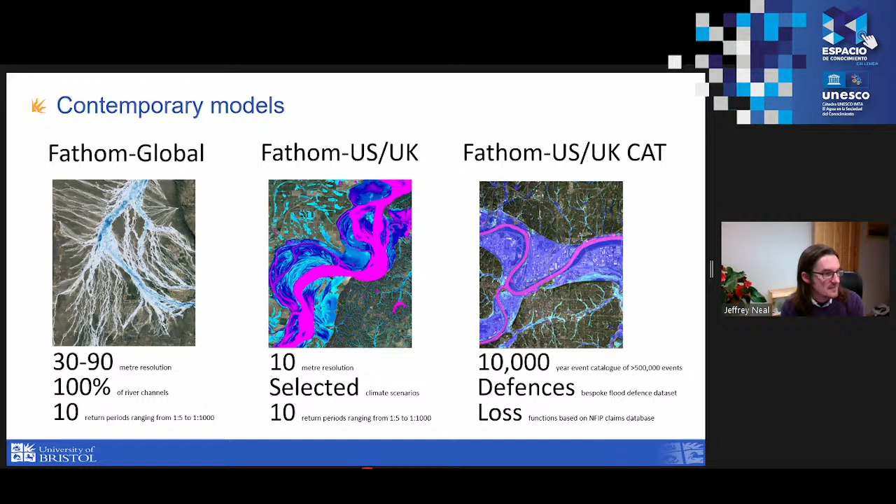We can see it in a coastal example as well, just south of Bristol - Bristol is up here. This is the Somerset levels, an area that has historically flooded quite often in the UK. Again we see agreement between the Environment Agency's flood map and our global flood model.

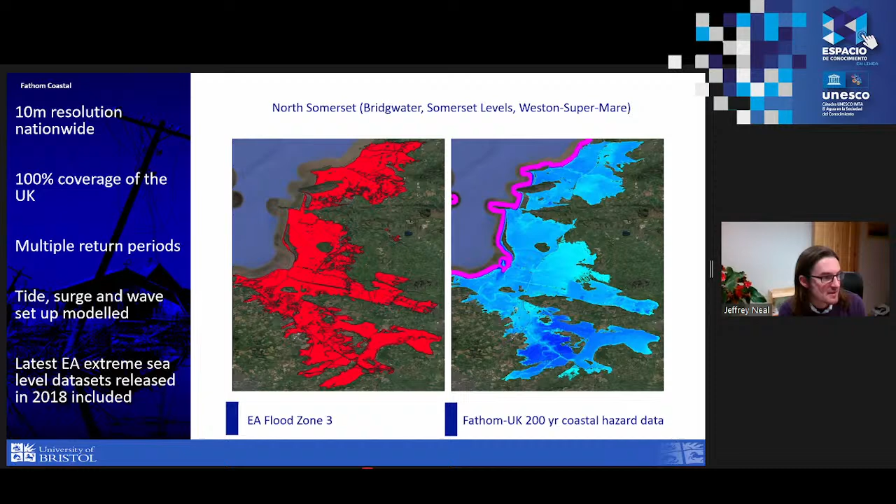So at this point you might ask, why bother running this model when we have data from the Environment Agency on flood extents? Why do we need another dataset? Well, the reason is that once we've set this model up, we can run it under different climate scenarios quite easily - which is what we're going to do.

Lastly on this model development in the UK, we also include flood defences. The UK has a database of flood protection standards and defence height information. This is the city of Exeter - as Albert was presenting earlier from Exeter University, I thought I'd get an Exeter example. Here we see the River Exe running through the centre of the city.

And the flood extents, if we ignore the flood defences... then we can look at the 1 in 100-year flood extents if we include the flood defences in the model, successfully protecting many of the urban areas.

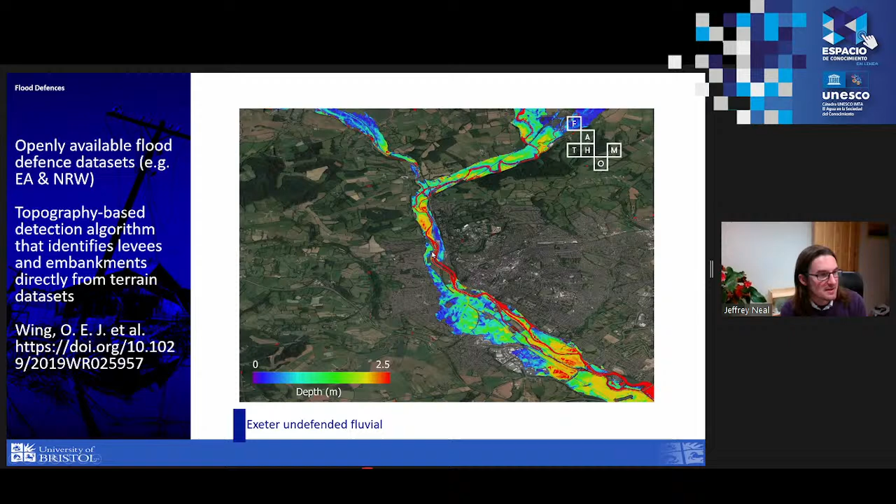Interestingly, because this is a hydrodynamic model, we can also see the impact the flood defences have on inundation upstream. If you look carefully at this area where I'm circling with my mouse, at the north end of the city, you can just about see that when we don't have the flood defences in place, the water depths just up here are a little bit shallower than when we do.

Essentially, the space being taken up for the water by the flood defences is forcing that water to inundate the floodplain a little bit deeper upstream, and downstream there's some additional flood depth as well - things you might expect from this type of model.

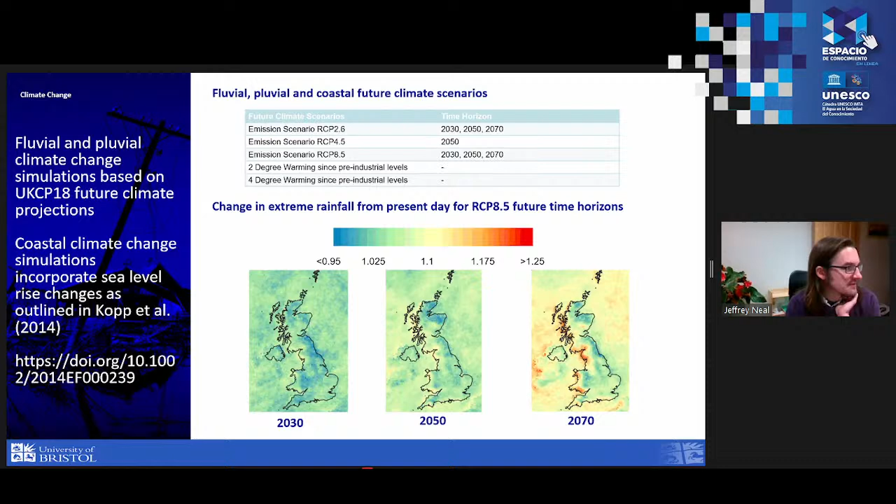We've also had sea level rise scenarios to go with these, using data from UK climate projections 2018. So here, now looking at an example from Bristol, this is Avonmouth, present day and 2070 under RCP 8.5.

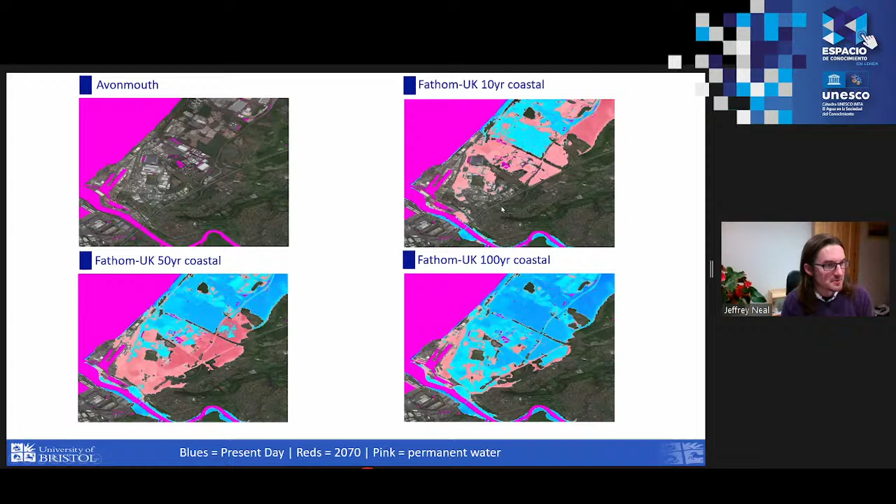The flood extents that we'd expect for the 10-year and the 100-year flood extents, what we really see is a big growth in the low return period flood extents, which are areas we wouldn't want to flood this regularly. And we can pull out kind of national scale analysis from this kind of data.

So this is present day flood risk in the UK, the number of properties with more than a 1% chance of flooding in any given year, so properties within the 1 in 100-year floodplain across the UK.

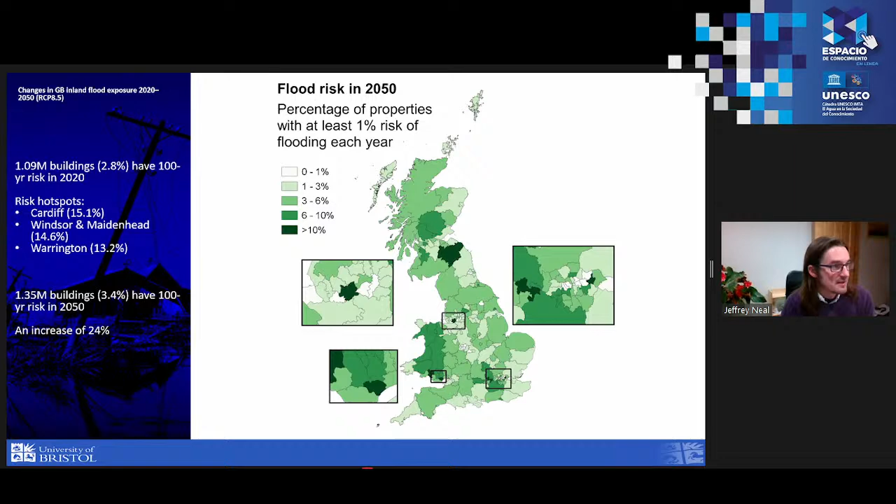We can then look at the percentage of properties in 2050, the growth in properties within this floodplain, in this case under RCP 8.5, and look at the change as well, seeing which regions are likely to experience the most change in risk over time. We particularly see South Wales as a hotspot, and some places in London.

This includes pluvial, fluvial, and coastal flooding in this analysis, which is why the spatial pattern is quite complex, and also the flood defences are quite complex as well.

So that's the story from the UK. Just to finish up, I'm going to go a little bit north of the border from Mexico into the US, and give some examples from the conterminous US. Here's Houston again, the 1 in 100-year coastal flood extent for present day and future. This will mainly be based on hurricane storm surge, with the addition of sea level rise in the future and perhaps some intensification of those hurricanes.

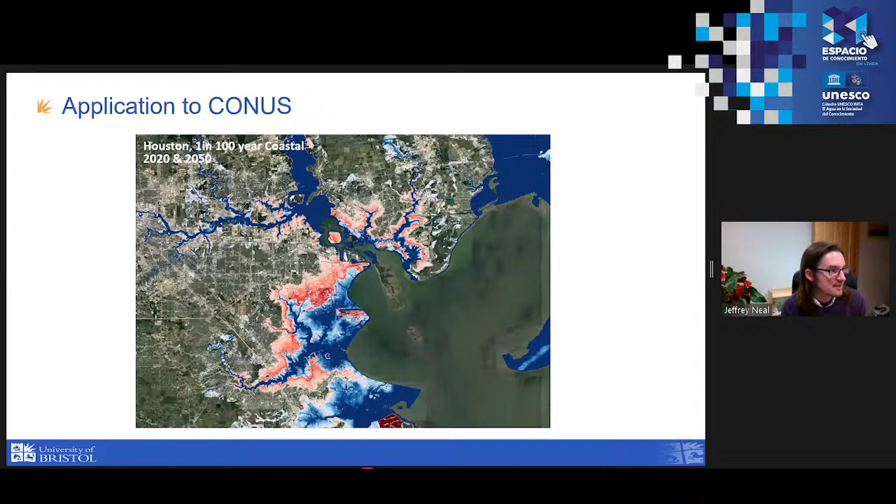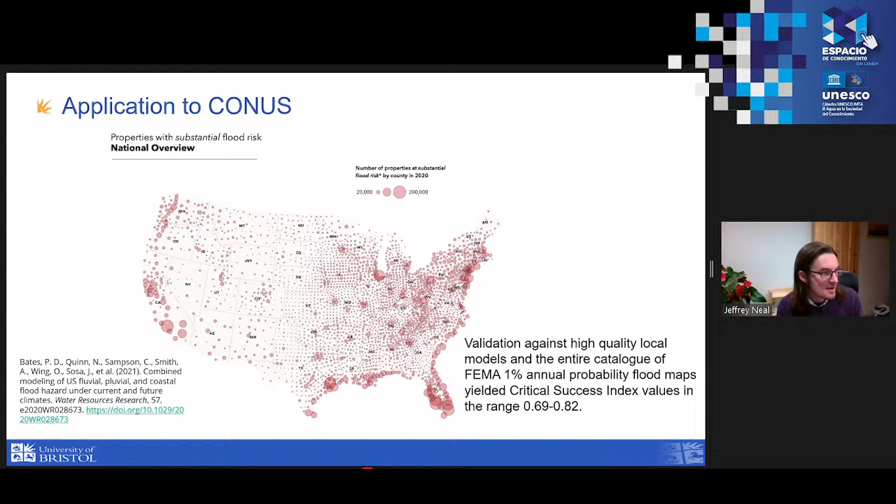When we apply the climate scenarios, in this case RCP 4.5, we can see some quite dramatic increases in risk, particularly along the Gulf Coast of the US and up the eastern seaboard - an 18% rise by 2050 in the number of properties in this 1% per year risk category for Florida, and locally some very large increases in the percentage of properties at risk.

So I hope that was interesting, and we would like to extend this work to include Mexico and the rest of the world in the coming year.

So just a summary: we've been working on global flood modelling. There's some skill and it works. There's been significant recent improvements, but we still have a limited understanding of uncertainties, and lots of work still to do on the climate sensitivity analysis to see into the future what risk might be doing due to climate change.

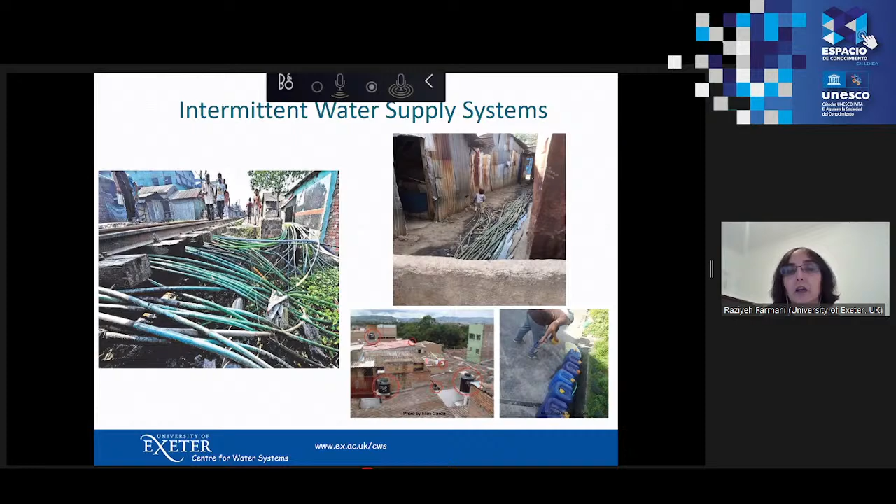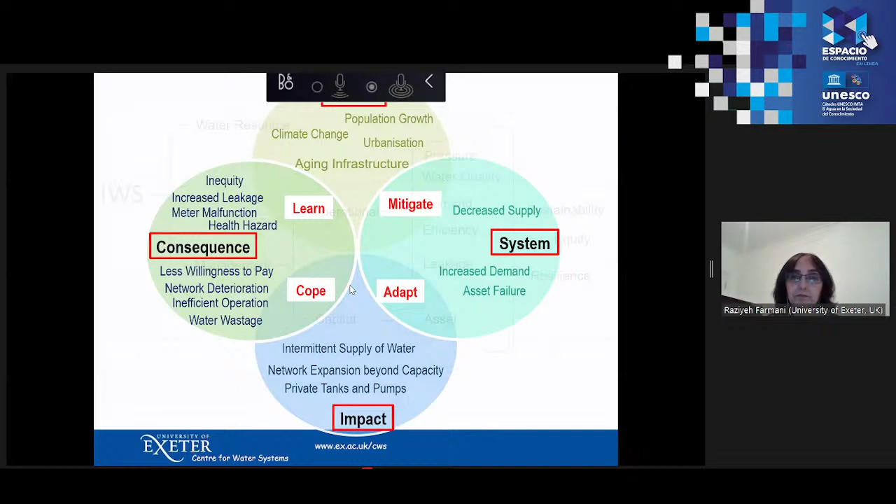At Exeter, we have a number of researchers working on intermittent water supply systems. The focus is not on the water resource itself—if we have limited sources, obviously there should be work on making more water available, looking at alternative sources—but mainly on management. Current research looks at how to better manage these systems, whether sources are limited or sufficient, to ensure equity among customers and reduce leakage and wastage. We focus on operational measures like pressure, demand, and leakage management, as well as capital investment and asset management to ensure sustainable, resilient systems that provide equity among customers.

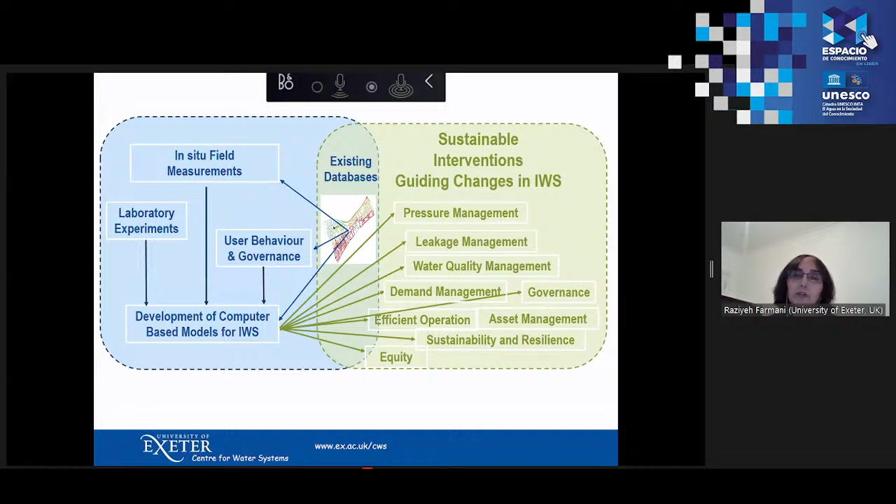We are doing a lot of work on modeling. Current existing models for continuous water distribution systems are not suitable for intermittent water supply systems. These systems have their own characteristics, and we can't just use existing methodologies and tools to capture their real behavior. So we do laboratory experimental work, field measurements, and study uncertainties related to user and utility behavior governing these systems, trying to develop models that better represent them. Using these enhanced models, we introduce interventions to guide changes in intermittent systems and eventually contribute to the transition from intermittent to continuous water supply.

Currently we have several PhD students working on different aspects of this modeling. Existing hydraulic models are not suitable for these systems because they mainly work on pressurized systems, assuming the pipe system is fully pressurized. However, in intermittent water supply systems, we have a filling process, a pressurized state, and an emptying phase, which can have a big impact on equity among customers.

Another big factor requiring changes in the hydraulic models is that customers have tanks and fill them, and their behavior is not very clear—they leave taps open because they aren't sure when water is going to arrive. So we are expanding existing tools, EPANET and EPA SWMM, further developing them to better capture these characteristics of intermittent water supply systems.

We are also doing a lot of work on uncertainty quantification, improvement of equity indicators, and sectorization of these systems to better manage them. These systems are especially prone to leakage—in some cases we could have 60-70% leakage—so we work to reduce leakage and improve efficiency.